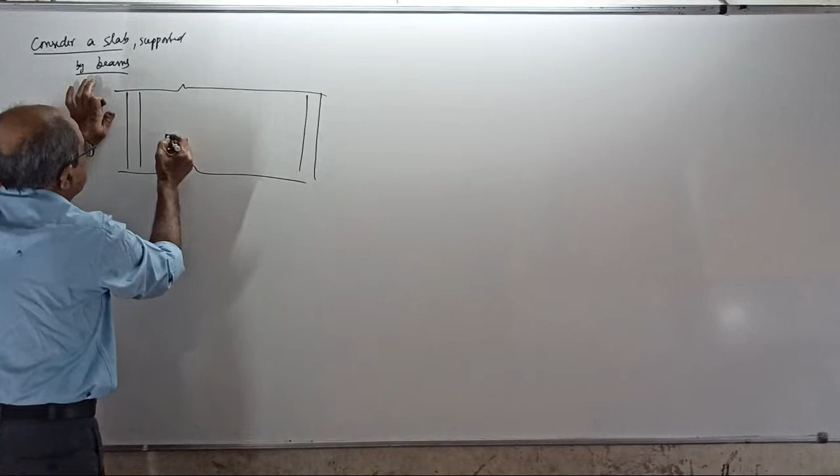Remember this - for others it is extra information. This is ETABS modeling. This is the slab here, cut - now this is the slab. See, the slab is spanning like this. This is a beam here. Imagine center to center is some span L.

Now tell me, when you design the slab, what is the most important term for slabs? Fast - most important term for slab. See, in case of beams, the cross section is B by D, where B is the width and D is the depth.

If I take the cross section here, for slab also the cross section is B by D only. But remember, D means what? Tell me, for slabs, what does this D mean? Fast, do not waste time.

Fast answer - where do you get these ideas from? For slab, D stands for thickness - slab thickness, or depth of slab. You can write slab thickness or depth.

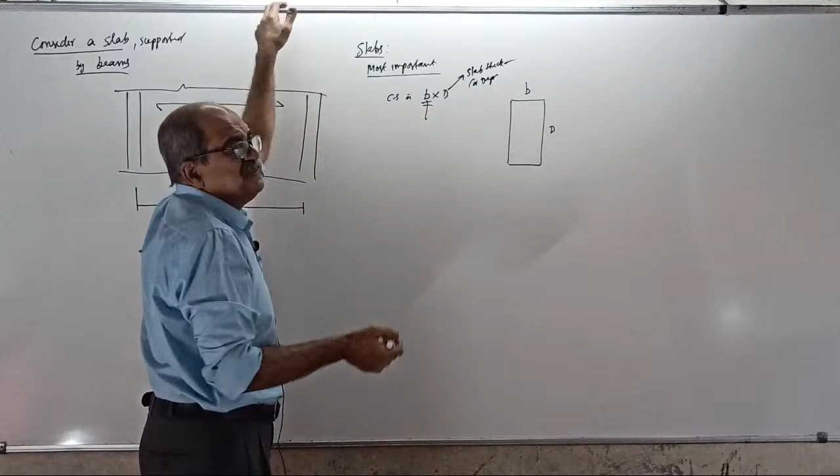Therefore what you do is - the width is not specified. Suppose there is a beam, room, slab, 4 meter by 5 meter. Imagine 4 meter this way, 5 meter this way. If I design the slab along the 5 meter span, width will be 4 meter. If I design along the 4 meter span, width will be 5 meter. But that way people don't take it - for understanding, we always consider what?

For slabs, remember, we always consider a 1 meter strip. How is it? If the slab is spanning this way, remember the strip will always go along the span, this way. This is the width strip of the slab.

This is 1 meter. Now if I take a cross section, what can I see? You can see the slab like this - this is width of slab B, this is D. D is the slab thickness, and this B becomes 1 meter. Clear now? When you see lengthwise bending, B comes here - this is your 1 meter, this is your B.

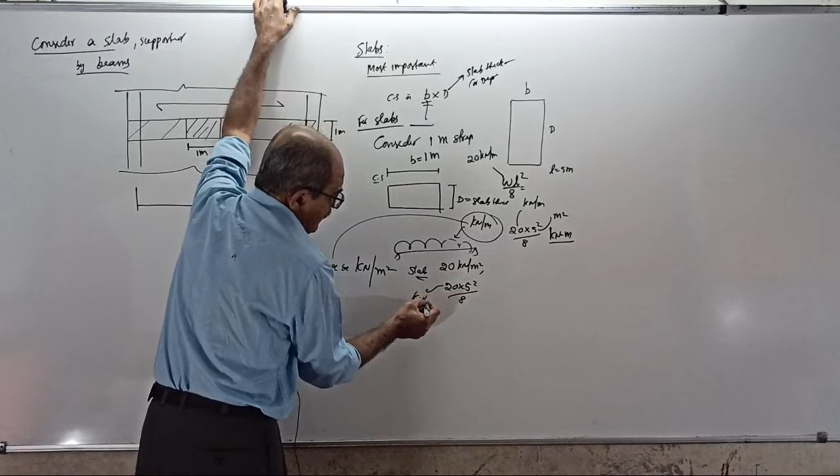But for slab, if you take the load the same way - 20 kilonewton per meter square - when you take bending moment, 20 into 5 square divided by 8. 20 is in kilonewton per meter square, 5 square is meter square. Tell me what happens - kilonewton per meter square into meter square will not become kilonewton meter, it will become kilonewton. For beam, kilonewton per meter into meter square gives kilonewton meter. For slab, kilonewton per meter square into meter square gives kilonewton. Clear or not?

Fast, clear or not? No, this is a wrong concept. It is not kilo - how can the bending moment be in kilonewton?

This will also come in kilonewton meter only, because this 20 kilonewton per meter square is kilonewton per 1 meter length and 1 meter width. Don't consider width for bending moment - it's lengthwise bending moment. When you take lengthwise 1 meter, it is 20 kilonewton only, or kilonewton meter per meter strip.

So therefore, in case of slabs, even though we write loading as kilonewton per meter square, it is actually kilonewton per what? Other width is not considered. One word required, not meter square - it is kilonewton per meter only. But the other meter is the 'way' meter. So you write kN per meter square, but when you imagine along the span, it is kilonewton per meter.

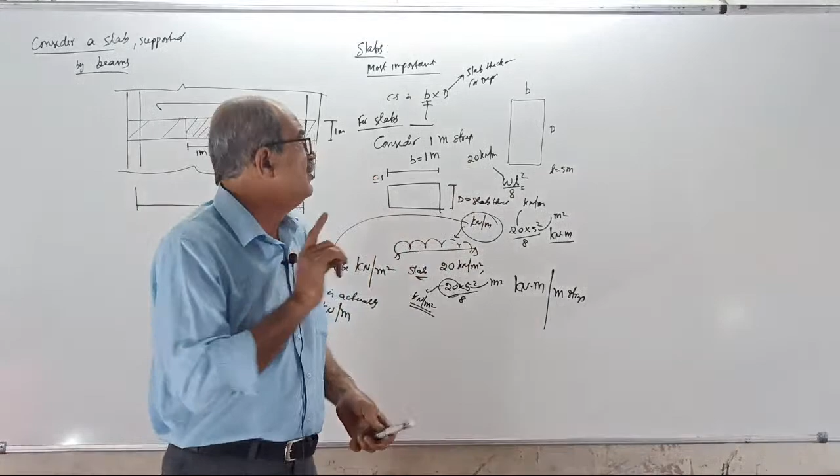Okay, now second one - this is one concept, I will not repeat it again. Remember, in building projects also this will come. I will not tell it once again - remember. Okay, now second important point.

See, suppose you take a beam supported by a column. Load is 20 kilonewton per meter, span is same, 5 meter. Tell me what is the reaction? 20, imagine symmetrical: 20 into 5 divided by 2 equal to 50 kilonewton. This also 50 kilonewton. Why? Kilonewton per meter into meter by 2, kilonewton. This is the upward reaction on the beam from the column, 50 kN.

Therefore, later when you consider the column, there is a downward load of what? From the column to the beam, if there is an upward reaction of 50 kilonewton, then from the beam to the column, a load of 50 kilonewton is transferred down. This will give compression to the column. Clear? This is the load transferred from beam to column. So therefore no problem - why? It is axial load this way.

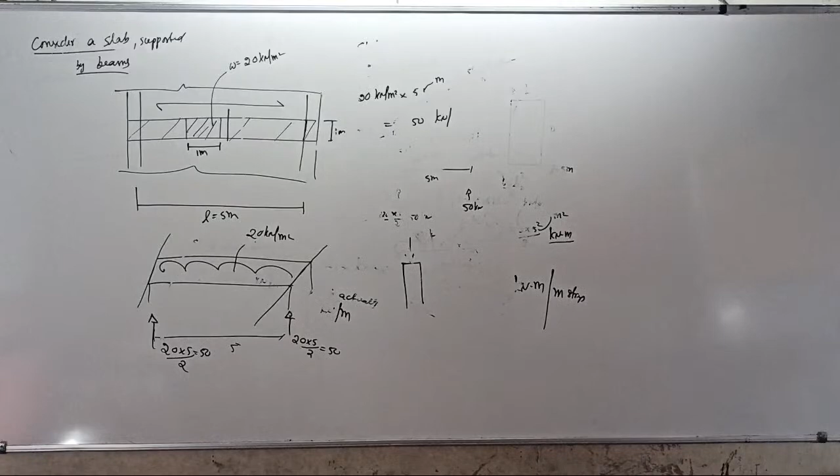50 is kilonewton per what? It is 50 kilonewton per meter. Correct. Now what you do is for SFBM calculation, 20 kN per meter square, you take as 20 kN per meter. 50 kilonewton per meter, you take as 50 kilonewton, because that 'per meter' is per unit width.

Now, when you consider the beam - this supporting beam - see what happens, tell me. I will put 3D here, if one beam, inclined, I show this way. See, the slab is resting, or the slab is resting for 1 meter length. For this 1 meter length of the beam, it is transferring a load of how much?

50 kilonewton. Therefore remember, if the reaction is 50 kilonewton for a 1 meter strip, tell me, from the slab, when the load is transferred to the beam, it becomes what? From the beam, when you transfer load to the column, it becomes a point load. Same way, when you transfer load from slab to beam, it becomes not a point load - along the beam, the load is spread for what length?

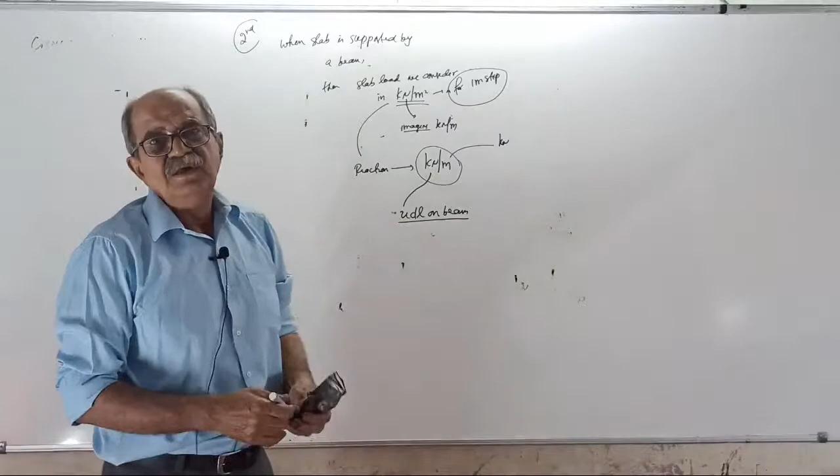But remember, this kilonewton per meter reaction for the slab, whatever comes, when you reverse it, will become UDL on the beam. Concept clear now? Even though you take load in kilonewton per meter square, reaction will come in kilonewton per meter. Kilonewton per meter square, you structurally calculate, consider kilonewton per meter. Kilonewton per meter is kilonewton, that per meter is width, this way meter, not required for us.

When you transfer load from slab to beam, whatever reaction is there for the slab, that is not a point load, it is UDL for the beam. Clear? It is UDL for the beam. Okay, now go to some other points.

Now some other point, I will just dictate here. I won't write because all of you are knowing it. Those who are in the ETABS and SAFE batch and also those in the RCC batch, all of you know it. Others should know it, otherwise briefly.

For a slab, diameter of bar should not be taken more than 1/8 of slab thickness. One concept: minimum clear cover is 20 mm for mild exposure and 30 mm for moderate. We will always take moderate, we will not take mild. So 30 will take. Then next point, slab thickness.

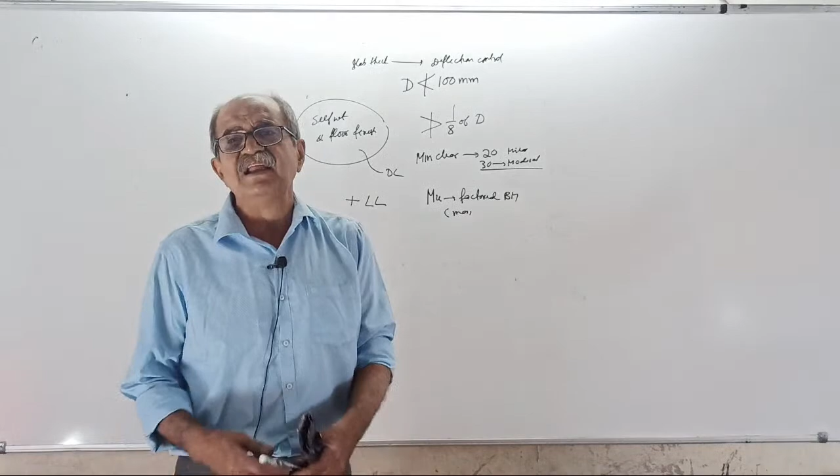So if the bending moment exceeds the limit, it is advisable to redesign the section, as I told for beams. Slabs are not doubly reinforced; slabs are always singly reinforced. Therefore, for every slab, your mu should not exceed mu limit, or you should always get mu less than or equal to mu limit.

Then, how to find area of tension steel? Find AST by the equation mu equal to 0.87 Fy into AST into D into 1 minus AST Fy by BDFCK. On solving, it will give a quadratic equation. Take the least value; two positive values will come, lesser is the AST required.

Next, for slabs, minimum steel in any direction is 0.12% of gross area in case of Tor steel. However, remember, if you use mild steel, we are not using that, why waste time. Generally, 0.12%. You should not give steel less than 0.12%. Tell me, if it is mild steel, how much it is?

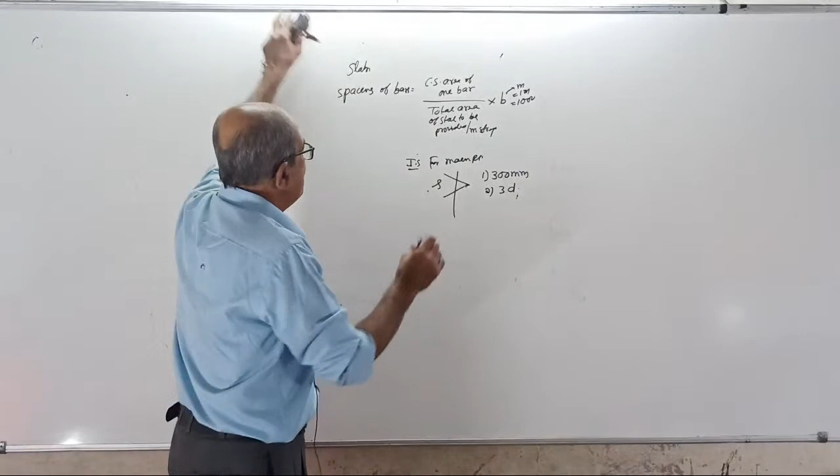However, for distribution reinforcement, spacing should not exceed 450 millimeter. Second one is 5 times the effective depth.

And now, lastly, check for deflection control. How to check it? Find L by D actual. Remember, L by D actual is the danger number, I told you this is the danger number. We want this as less as possible. L by D actual is the danger number. Okay, find L by D actual.

Then, after that, find L by D maximum permissible, equal to a constant based on end conditions, into modification factor on tension side. The constant based on end condition is 7 for cantilever, 20 for simply supported, 26 for continuous.

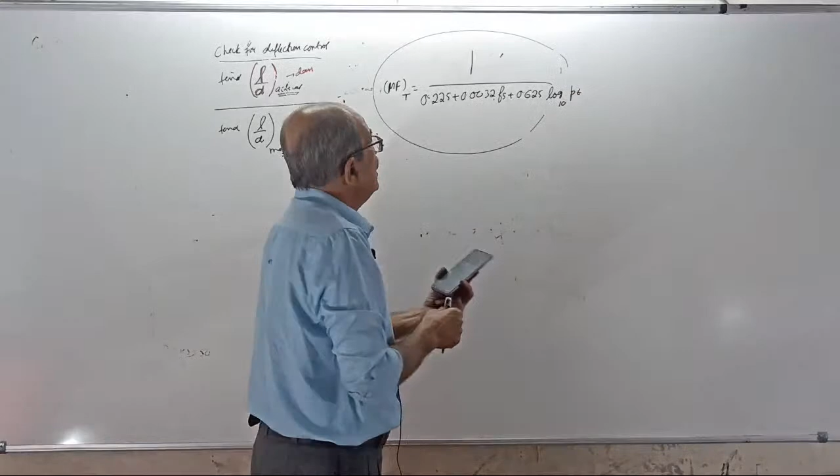Agreed? 1 by 0.225 plus 0.0032 times Fs. Yes, 1 by, thank you, correct. 1 by 0.225 plus 0.0032 times Fs plus what? Plus 0.625 into logarithm to the base 10 of Pt. Correct? Correct now, logarithm to the base 10, because in mathematics and structural engineering, if you simply write log, it is to the base e, not 10. I think the formula is correct: 1 by 0.225 plus 0.0032 Fs plus 0.625 logarithm to the base 10 of Pt.

Yes, okay, now 1 by 1 term. Here, Fs is stress in steel at service load, given by this. I don't require IS code for this because it is a proved one. It is 0.58 times Fy into AST required divided by AST provided. Clear now? AST required by AST provided. Clear or not? 0.58 times Fy into AST required by AST provided. Clear?

Okay, now Pt is percentage of tension reinforcement. Remember, so many places they write tension reinforcement provided, which is technically wrong. I proved it in the RCC class talking for 1 hour. If I meet the IS code committee next time, I will raise a big issue there. It is tension reinforcement required. That's why it is called Pt required equal to 100 into AST required divided by BD.

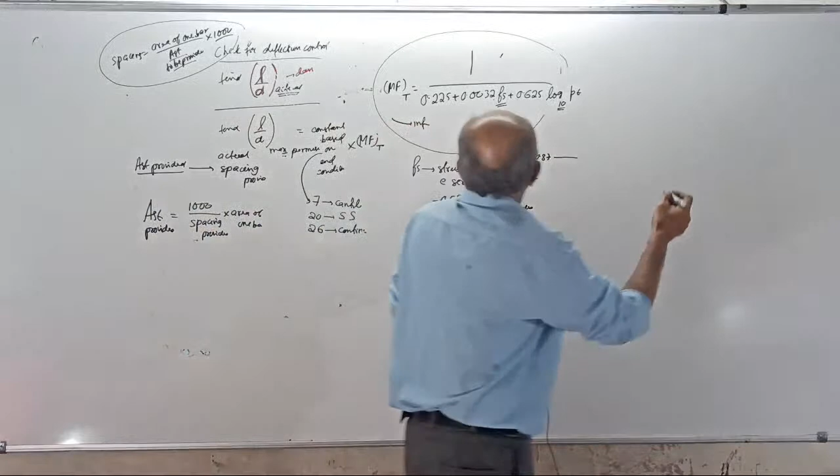And for your information, I will write somewhere here, I will forget later: 0.225... who knows, 0.0032, I will again forget it, and 0.625. And for your information, those who are in the ETABS and SAFE batch, you don't have to

perform check for deflection manually. Tell what to do, tell me what to do, you don't have to struggle. All you require is what? Use what, very thoroughly we covered. To check for deflection it will take 10 seconds. What do you have to do? Tell me, those who are in the ETABS batch, you can tell. To check for deflection, what to do? Fast, you don't have to do all these things, directly it will tell you safe or unsafe.

Tell what to do, to check for deflection control for slabs, what to do, fast. You are not answering. What you have done long back in slab marathon, when you want to check for deflection, I told you during project also the same thing: you got Excel sheet, use the programming, we got Excel program to check it. Today what I will do is, when the check comes, briefly I will check manually. Simultaneously, one of you check in Excel and tell me answer tallying. Agreed? One of you tell me check by Excel and tell answer tallying.

See, now in case of ordinary slab, slab is like this. Self-weight will act like this, floor finish also will act like this, live load also will act like this. So if I take the slab here, this way slab, strip of 1 meter. Load is downward, bending comes this way, yes or no? Therefore, no problem, just similar to beam. Only change is we consider 1 meter strip, load is kilonewton per meter square, reaction is kilonewton per meter. Kilonewton per meter square is kilonewton per meter only, and reaction, kilonewton per meter is kilonewton for 1 meter length.

Okay, now in case of staircase, see, there is 1 meter. I dropped the cover—if the cover is not there, this will stop writing. One minute, where is it? Just a minute. I got it, luckily got it. See, in case of staircase, imagine there is a landing slab here, this way.

Okay, sufficient. Then this is the waist slab. It will go like this here, see. This is the staircase. Now see here, this is the landing slab, horizontal, landing portion horizontal. This is called going, see, this is the inclined portion. People call this as going—horizontally called going, see, this length horizontally is called going. Remember, later I will not tell. Here, see, whatever is the inclined portion is there, its horizontal equivalent is called going, G.

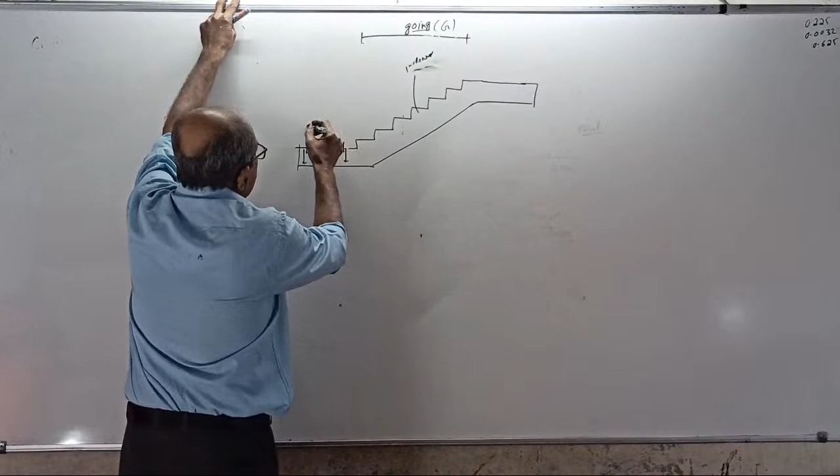Okay, over. Now see here, self weight acts this way, finishes also acts this way, live load also acts this way. So therefore no problem here, loading is vertically down. This is the span, correct? This is the span, tell yes or no. Same thing here also, same thing here. Fully clear? For landing, it is like ordinary slab. Landing slab is this way, load self weight also is vertical. Then self weight vertical, finishes vertical, everything is vertical, span horizontal. Fully clear? Tell me first.

Okay, now consider the inclined portion. Tell me, for inclined portion here also, live load is vertical only. Remember, for inclined portion also live load is vertical only, don't tell horizontal, live load is vertical only, correct? Nobody is going this way. Live load is vertical, and then weight of steps also is vertical, is this way, see, weight of steps also same way. Then what about the waist slab?

What about the waist slab? Live load is this way, weight of steps are this way. What about waist slab, vertical or inclined? Fast, only waist slab - inclined? No, sorry, wrong. Weight of waist slab is also vertical.

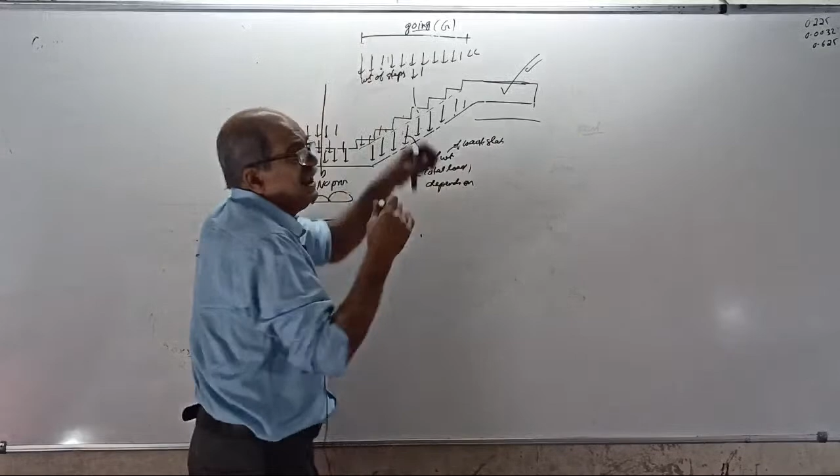But total load of what - waist slab, self weight of waist slab - depends on what length? Horizontal length or inclined length? Tell me.

Load is vertical only, but the total load when you calculate, it depends on horizontal length or inclined length? The total load depends on inclined length. Remember, even then, load is vertical only. If load is vertical, when you take moment, load into this distance. So for bending moment calculation or shear force, we consider horizontal span.

But total load depends upon inclined length. So tell me what to do. Therefore, for self weight of waist slab, we have to increase the load or decrease the load? Self weight of waist slab - increase or decrease?

Fast, I won't go into theory here. If you remember, those in the RCC batch, I proved it mathematically. We have to increase the load - increase the load intensity.

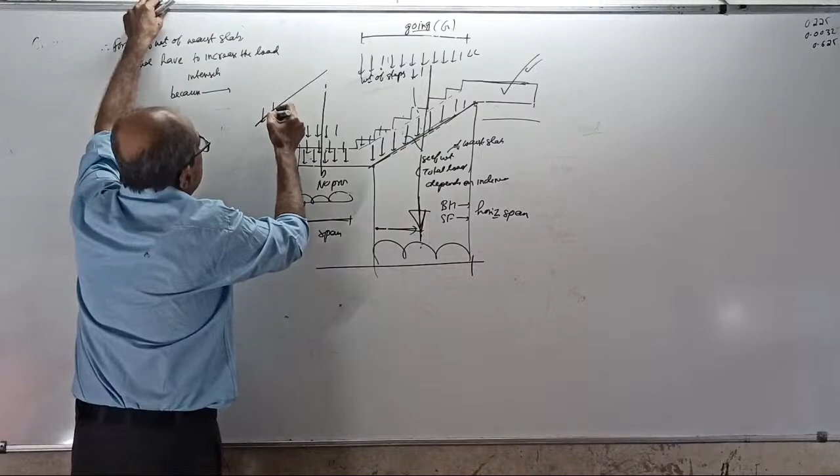When the load on a larger length is replaced by equivalent load in smaller length, total load should remain same. Suppose, for example, along the inclined length, if the load is 10 kN per meter for an inclined length of 5 meter, imagine for the same 5 meter, horizontal span is 4 meter. Tell me, what is the UDL here? It is 10 kN per meter for 5 meter - that's the total load divided by how much?

Total load should remain same. 10 into 5 is the total load, but divided by how much length now? To get the equivalent in plan, divide by 4. 10 into 5 is 50 kilonewton. Earlier, 50 kN spread over 5 meter. Now 50 kN spread on 4 meter will become 12.5 kN per meter.

Or I will give a formula for you. If it were an RCC class, I would tell you normal component, tangential component, resolution, etc. - anybody who came to RCC class will remember I told all those things, and I did the BM 3-4 times using normal component and inclined span etc. Everywhere the answer came same, but this class is not for that theory.

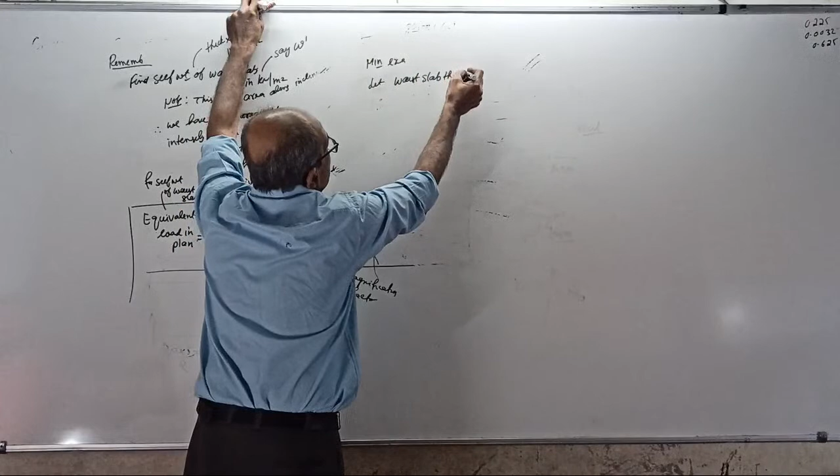Now, whatever answer you get, change it to get equivalent in plan, just to understand so that later no trouble. One mini example: let waist slab thickness equal 150 millimeter, and let R equal 160 millimeter and tread equal 275 millimeter, random numbers for rise and tread. Now see what to do.

First, self weight of waist slab. Don't write the full formula. Waist slab equal to, formula is thickness of waist slab 0.15 in meter. Width is not there, we want per meter square area, multiplied by 25. Tell the answer, it will come in kilonewton per meter square. If somebody asks me sir why 25, don't come to my class, leave the class, you are not knowing about RCC, then why did you come to staircase class?

Answer: 0.15 into 25. For a beam you have to write width into depth into 25, then you get kilonewton per meter. Now only depth. Answer fast.

3.75. It is 3.75. Now this load is to be magnified. How? Therefore calculate equivalent of this load in plan equal to whatever answer you got there, into square root of T square plus R square divided by T. Remember, here unit is not a problem. Take the answer 3.75 into root of, since it's in meter square, tread is 0.275 square, rise is 0.16 square, divided by 0.275. Answer: it will come equivalent in plan.

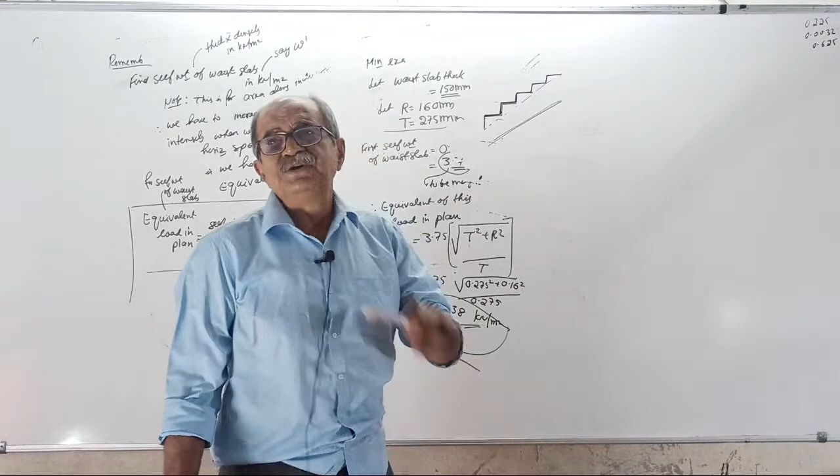Tell me, and sometimes handrails will be there. They are not very major, minor. So considering what, finishes for tread and rise both, and also handrails and plastering etc, ceiling plastering all. When you consider floor finish, consider slightly what, higher or lesser? What usually comes in normal case? Don't waste time on equivalent for that one, consider slightly higher side, that's all.

If someone tells exact calculation, then I will take him to task. Exact calculation you want, do it then. I will tell them, how did you find bending moment? WL square by 8, is it simply supported there? No, there is a beam there, partial fixity is there.

Rigid joint. Account for the moment there. That's all you are not considering - the major issue you are not considering. And just this small variation you are bothered about? So keep quiet, that is the answer I will give. If he answers that question, I have further questions to ask. My questions will never end.

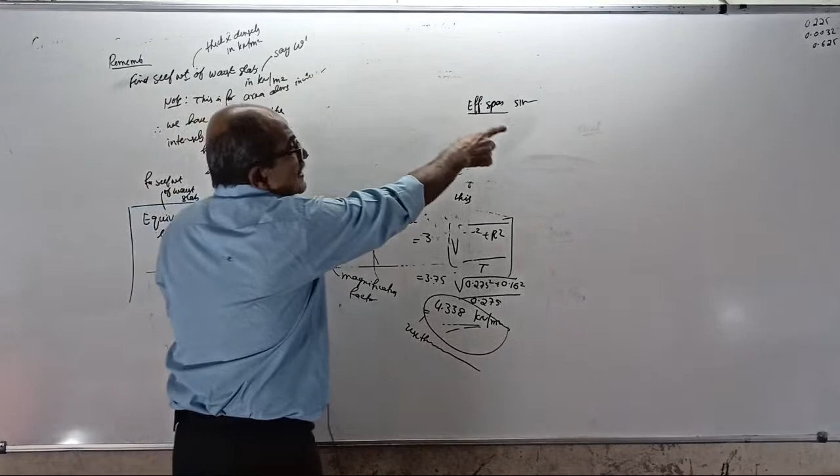Okay, now we are ready for design of staircase. The only important thing is how to find effective span - that I will tell you simultaneously with our first solution. How to find effective span, I will tell simultaneously. Somewhere here I solve the question, and side by side I will write the effective span portion here. After the class, whatever I write here, make a separate note - this saves time, otherwise you have to take numbers separately. So I will start the solution here, then side by side I will tell the IS code provisions.

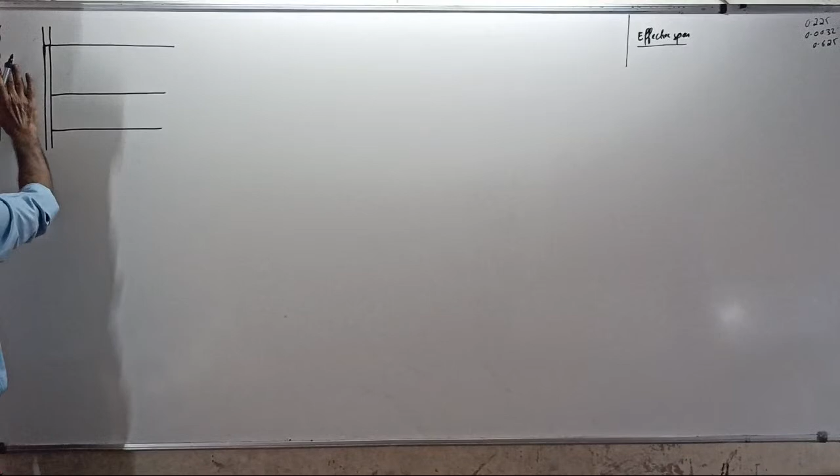See, imagine this is the staircase room. There is a beam here, a floor beam, and then this is the staircase. And remember, the floor beam may continue - there can be slab here, slab will be there, don't worry about it, slab can be there. Now, see - 1, 2, 3, 4, 5, 6, 7, 8, 9, 10 treads.

Means 11 risers, then this way. I will not do an academic question - academic questions are done some other way, how they give in examination, that way you won't do. Then there will be a landing here, mid landing, and there will be a beam here also.

This is the supporting beams. Just imagine the supporting beam width is 0.2 meter, 200 millimeter. This also is 0.2. This is a beam - see, I will put one thing, a light line, I will have the beam, just to show it can be wall also. Wall is not considered. Now imagine rise is

say 150 millimeter, very popular. And tread is - rise means R, tread is T. Rise I will take 150 mm, 6 inches, very very popular, 150 mm.

Tread I will take as 250 millimeter, that is 10 inches. That is the tread. Therefore, see, this is the width of the landing slab, the mid landing slab width.

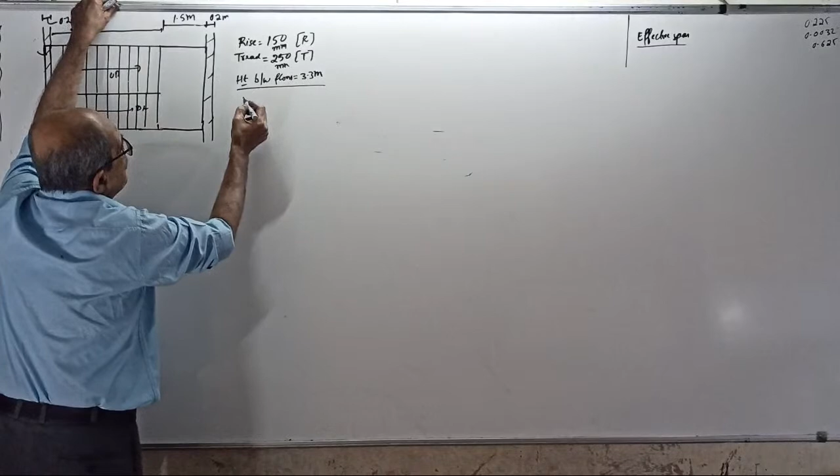Then further, I want first, what is this dimension? Tell the answer. See, there are total number of risers. Number of risers equal to 3,300 by each rise is 15, 150.

Tell how much. Sometimes for some reason it may not be 150, it can be 152 point something. Suppose the height is not a round number, they will adjust it, no problem. Suppose height is 3.25 meter, rise will be 148 point something. Or if height is 3.35 meter, rise can be 151, 152 millimeter point something. That is no problem.

22 is the number of risers, that is, 11 risers in each flight. Clear? I am going for the first one, this is called dog leg staircase. Make a note, this is dog leg staircase.

Okay, 11 risers, and therefore tell what is number of treads, number of treads in each flight. Remember, if you have difficulty, go to a staircase, count and come back. If per flight, for one flight, 11 risers are there, tell number of treads.

Number of treads, 22 risers total, each flight 11 risers. Number of treads will always be 1 less than number of risers. It is 11 minus 1 equal to 10.

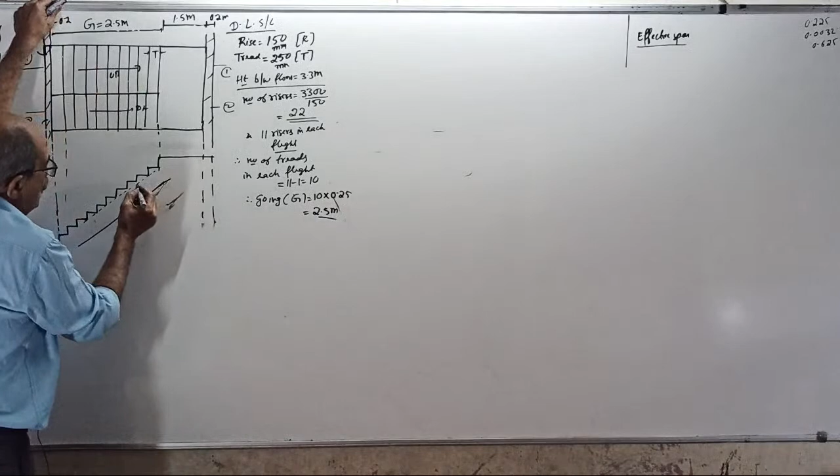Now this is the line joining the edges. Parallelly you can see waist slab thickness here. See here there will be, see what will happen here, there will be a beam here. Here no beam, usually beam is not given here. If it is given, I will tell you later. This will come this way, then see what thickness is there, you maintain that one. Do not do this way. See, do not draw like this at all.

Maintain the same thickness here.

Okay, done. Here what will happen, there will be a beam here. See, this is a beam. This is a beam here. Here beam will be, this is a beam. Nobody wants beam inside portion here. See this arrangement.

Clear? This beam width is 0.2 meter. This beam also is 0.2 meter. And this total length here is 2.5 plus 1.5, exactly 4 meter.

Therefore, the center to center of beams, see, this will become what? Effective span, or L effective. Tell the answer in meter. Tell the answer from center of the beam to center of the beam. Effective span. Tell the answer.

I want to show the calculation. Effective span from here to here is 4 meter, 0.2 there. Effective span, fast effective span, 4.2 meter is effective span. 4.2 meter effective span. This fully clear?

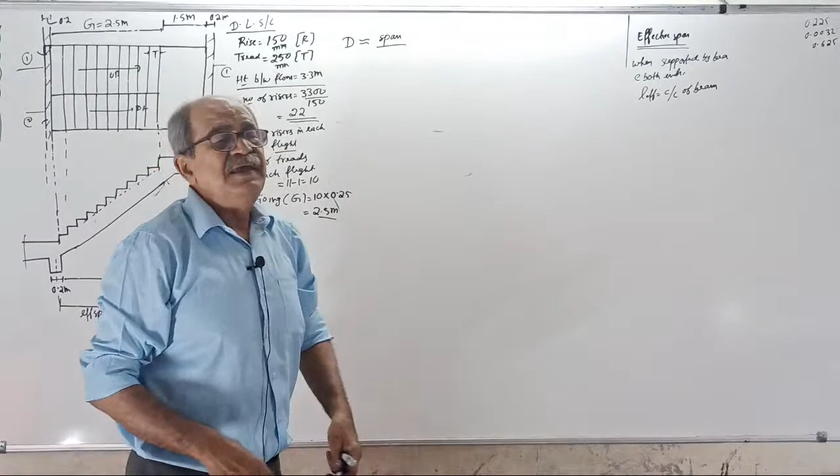Now, once you get effective span, you first calculate slab thickness of slab, capital D. Capital D can be taken approximately span by, if you remember, tell me the answer. Now, depends upon, is this simply supported or continuous or what? Is it simply supported or continuous?

I want to design only staircase slab. This slab I am not bothered. This slab will come in the floor design.

See, you can see one, as you enter the staircase, below one beam will be there. You go there, reach the mid landing level, there is a beam there, supporting beam, come take a U-turn and then again go up next beam level. It is actually not simply supported.

Remember, make a note here. If I see along the length here, if I put inclined portion here, see, there is a beam here. It goes this way, then this way. There is a beam here. Actually, it is monolithic with the beam. Yes or no? It is, see, monolithic with the beam.

And here also, when the beam is there, there is continuity here. There is continuity here, and here it is monolithic. Tell yes or no? There is a continuity here, and there is monolithic. These all you have to remember.

I am going for practical design, not academic design. My class is for ETABS and SAFE batch. Others get benefit if you understand.

Yes, therefore there will be a reacting moment here. There will be some reacting moment here. Remember. But what happens is, this is inclined, this is this way. It is not purely continuous, or it is not fixed. This hogging BM at the ends, by chance, if ignored,

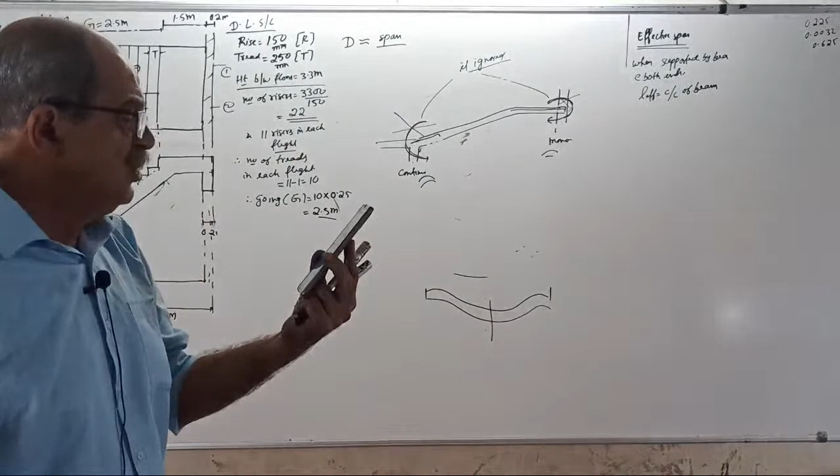Hogging is there. No problem. Afterwards, there will be top reinforcement here. Clear now? Afterwards, there will be top reinforcement there to take care of hogging BM. Clear or not? So even though we are designing as simply supported for easy understanding, there will be some hogging here, some hogging here.

Because of the hogging, what we will do? Because of the hogging effect there, later, sagging will reduce. We are designing for higher sagging bending moment. And for hogging BM, whatever bottom steel you provide here, same top steel also you provide. So you are providing high hogging steel. So it is safe. Practically, all are doing like this.

And then, one important aspect, tell me, deflection control. Tell me, because of the hogging, deflection will be more or lesser?

One more thing, staircase is not like a single straight line. When there is a junction, deflection becomes more or lesser. If it is a single line, this is the deflection. But when there is a junction, will it increase or decrease deflection? That junction and also end conditions, will it increase or decrease deflection? Decrease deflection. Therefore, for deflection control, you can take continuity is there.

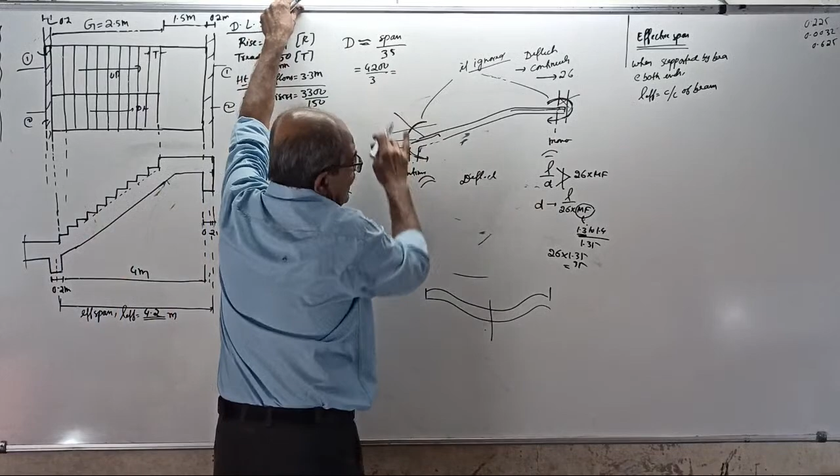Or you can do one thing, for safer side, tell what? Or safer side, take what? Not 35, take what little lesser value. If you take 35, thickness may come lesser. Safer side, take practically 30. One minute now, I will calculate.

See, if I take 35, it comes to 120 millimeter, correct? Yes or no? If I take 35, it comes to 120 millimeter. Yes. If I take 30, it will come to 140 millimeter.

So tell me, span is around 4.2 meter. 150 mm thickness better or 125 better? Think a little. Span is 4.2 meter, 125 better or 150 better? Think a little. 150 better.

So take 30, still safer side. How much? 140 millimeter, round off. Therefore, try capital D 150 millimeter. Clear now? This step is clear. Try capital D 150 millimeter. Clear or not? And one more thing I forgot now, loading I will tell you.

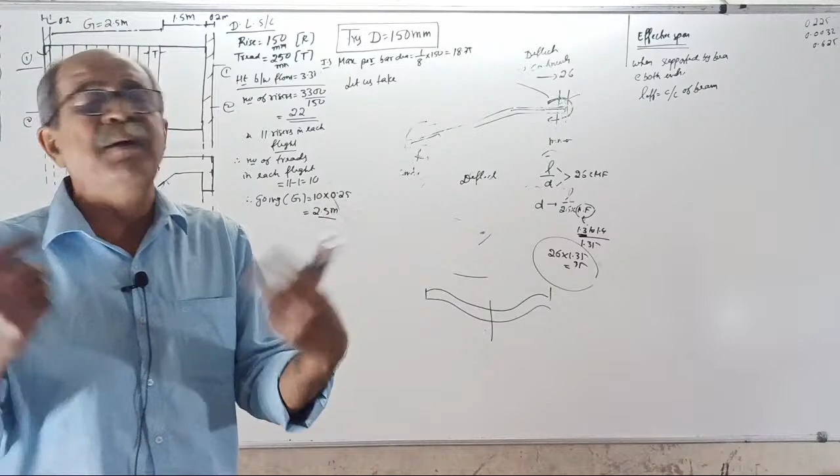4.2 meter span, loading is going to be more than usual slab. Yes or no? For staircase, loading is going to be more than usual slab because self weight of staircase is to be converted, then weight of steps are there, etc. Loading is more. On those reasons, better take in the beginning higher diameter or lesser diameter? I told you, if you take a diameter, later if you are changing, if you decrease the diameter, well and good, no problem, your D will become more. But in case you have to increase the diameter, problem will come.

Better take higher side. We will do one thing. Say, for this staircase, I feel 12 tor is okay. Clear? You write there, I think 12 tor is okay. I feel 12 tor bar can be managed.

But still, tell me, to be on safer side, later I do not want trouble with the D. I will take, let us initially assume diameter of main bar, tell how much, safer side, for margin. How much? I will not take 12, how much I will take? For safety, later I do not want redesign, take 16 mm, so that later if you reduce, well and good. 16 mm, okay, now minimum clear cover.

Remember, mild exposure for slab 20mm, for beam 10mm more for stirrup. Here for slab, clear cover we will take 30mm. That means moderate exposure.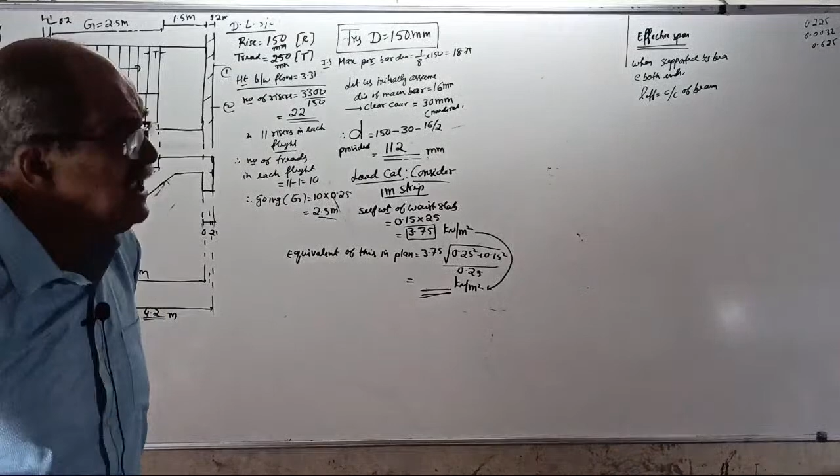Okay, then immediately calculate equivalent of this load in plan, equal to 3.75 into square root of tread square plus rise square, 0.25 square plus 0.15 square, divided by 0.25, as I told you earlier, kilonewton per meter square. Now this is cancelled, this will come as a new modified value. Equivalent in plan equals whatever you got there into root of tread square plus rise square divided by tread. This is the equivalent load in plan: 4.373 kN per meter square.

Now you calculate weight of steps. Remember, tell me, is this dead load or live load? Very important, because in ETABS, dead load and live load have separate assignment. This is dead load. Remember, this is dead load.

Now, weight of steps equal to, I'll give a note for you: depth into density. Depth into density. Usually for steps, plain concrete is used, therefore density is taken as 24 kN per meter cube. And depth means rise, yes? See here, this is the tread, now this is how it goes.

This weight is already over. Now this is the rise R. Depth is rise, clear? But one thing, since it's already over here, full rise. As you go here, the rise will become lesser, toward zero. Therefore, since the rise varies, take average rise: that is 0 plus r divided by 2, or r by 2. So self weight of steps is always equal to rise by 2 into density, per meter square. Clear or not?

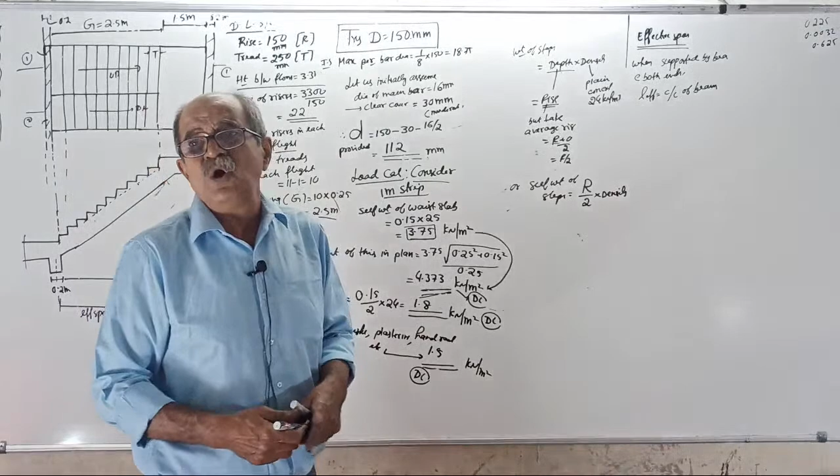Tell the answer, don't argue all these things. A little liberal, a little higher side. How much? Usually for building floors, 1.25 like that, but a little higher side, so that it's safer: 1.5. Okay, agreed, 1.5 kN per meter square. This also is dead load, correct? This also is dead load. Now therefore, this I will remove now. Even the effective span portion I will remove because I will continue later.

Tell yes or no. Now tell me, from here to here, tell the length. From center of support to the junction, tell the length. Center of support to junction, tell the length. Correctly observe the plan.

How many corrections? Center of support, that you should be able to calculate. I don't have to explain. It is 2.6 meter, this is 2.6 meter.

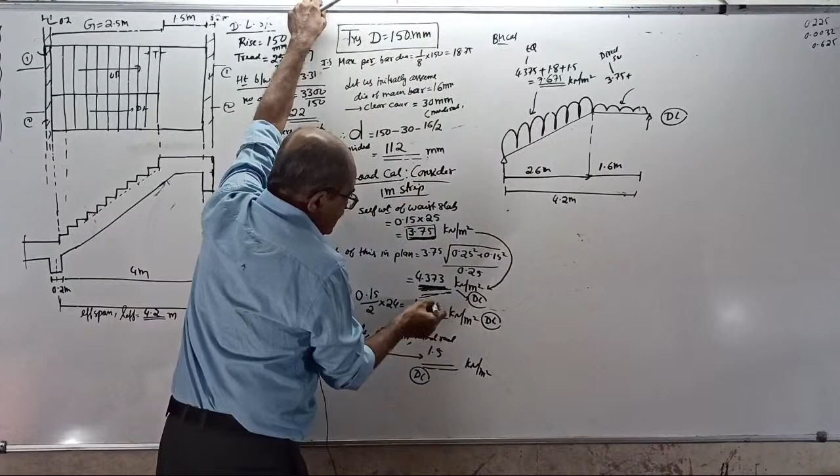Direct self-weight plus others are same. And remember, for landing slab, step weight is not there. Clear? Weight of steps are not there. I think that should be clear. There is no steps there. Clear? No steps there.

Not clear? No steps there for landing. Yes, so only finishes 1.5. Tell the answer, 3.75 plus 1.5.

I will tell you systematically, then I will tell you practically what to do. Remember, this class is for practical knowledge, not your academic knowledge. Some people will tell, how you can take that way? I am taking that way. Keep quiet.

Answer, add those two, I am writing only dead load. Add those two, it's 5.25. Okay, 5.25 is here, 25 kN per meter square.

Then now I want live load. Same way, I want live load. Live load is everywhere same. How much? Tell me, everywhere same. How much? This one and this one, both how much? Live load, see, how much live load?

Tell me, if it is residential building, how much you can take? Fast, imagine residential building around. Don't take high value. Residential building live load, around 2, 2.5, etc. Imagine our building is a commercial building, so imagine it is public office or commercial. Therefore, live load, I will take 4 kN per meter square.

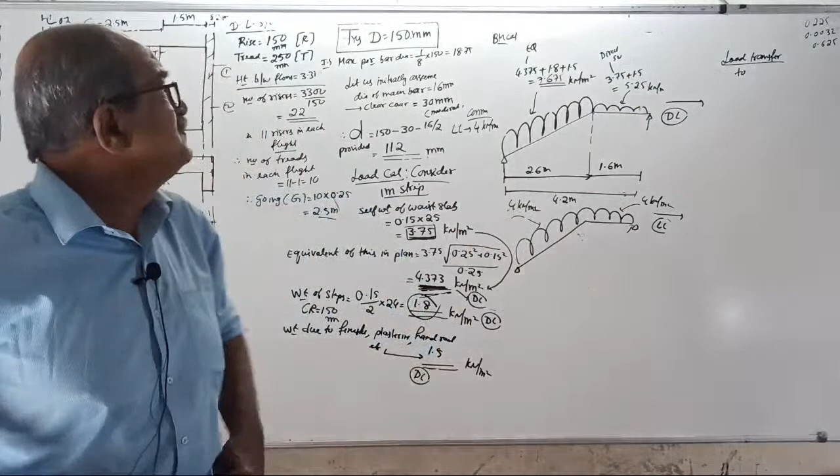Load transfer to what? Tell me. This is a practical class, and this is what is important for you. When you do the building model by ETABS, staircase load has to transfer to beams. Staircase load transfer to which one? Beams. Load transfer to supporting beams. For that, see, even though it is inclined, now load is vertical, length is horizontal.

Someone will tell, this is more length. It is more length, that's why we magnified 3.75 to 4.373. Therefore, now the length is only 2.6, correct or not? Now the span is only 2.6 because this 7.675, 4.375 is for 2.6 meter only. Clear? Important concept. Now the span is clear, no inclined length.

Now, therefore, what you can do is write one sketch here. See this way, visible, board visible fully. Let me see if the board is fully visible. Okay, visible. One sketch there and put one sketch here.

Here, for a length of how much? 2.6 meter, and then remaining length of how much? 1.6 meter. Here you write load of 7.675 kilonewton per meter square. Here you put lesser weight of, one minute now.

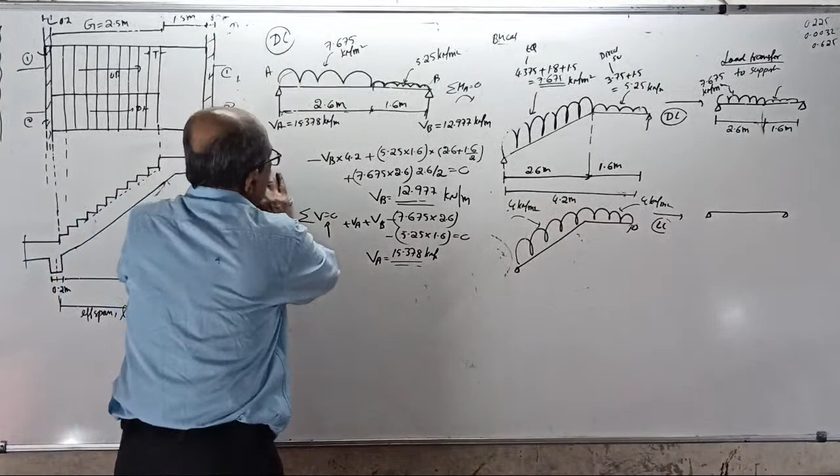Okay, now wait for some time. Some will tell, sir, this is too lengthy. No, wait for some time. Now consider live load. Live load, you don't have to show the junction.

Simply show a load of 4 kilonewton per meter square. Span is 4.2 meter. Tell the answer directly: total load divided by 2, this way and this way will be equal. Tell the answer: 4 into 4.2 by 2.

8.4 kilonewton per meter. Okay, therefore tell the answer now. See, I am removing this one now. Therefore, during

ETABS modeling, see, there is a beam here, and I will put the beam on meter, I will put a name here. This beam I will call P, Q, R, S. For the beam PQ, tell what? For the beam PQ, it is like this. For the beam RS, this is P, this is Q, this is R, this is S. Clear now? PQRS. Clear or not?

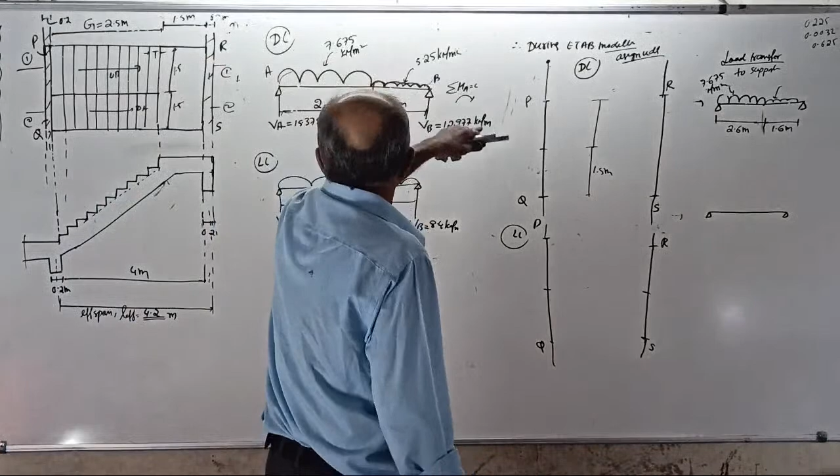Yes, you should know that one. Here, see, now very, very important. See, suppose it is mid-landing level. Mid-landing level, this beam, RS. Then what? Dead load of, tell how much, tell me. From R to S, assign dead load of how much, tell me. If it is mid-landing level, assign dead load of how much, tell me.

R to S, assign dead load of. See the sketch there, see the reaction here. This is for meter length. 12.977 kilonewton per meter. And this is for mid-landing beam.

Everywhere same. And assign live load of how much? For the contact length here, for what length staircase is in contact with the beam, for that contact length, assign live load of how much? Assign live load of how much? Tell the answer. See the answer here, reaction.

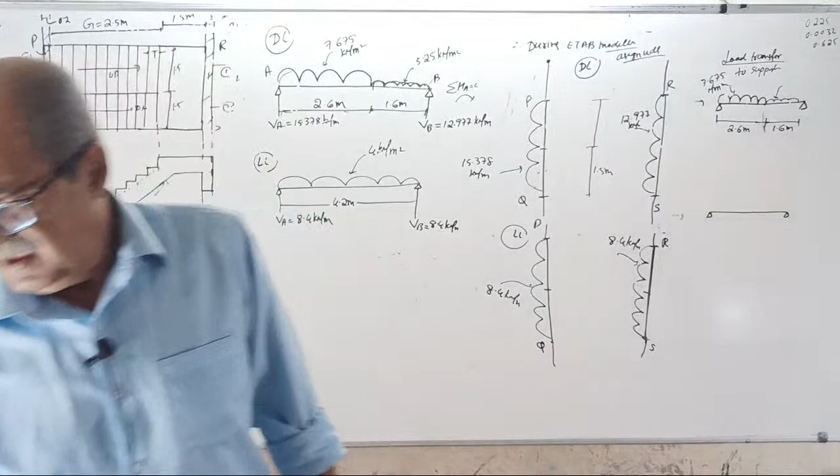But remember, if it is the plinth beam level, base level, suppose imagine plinth beam level, imagine staircase in the base has connected to plinth beam. Suppose no plinth beam, no problem. Why? Separate footing is given. If at the ground level, the staircase is not connected to plinth beam, they will connect to ground by foundation. Clear or not? A small foundation will be there. Clear? If the staircase and the ground is not connected to plinth, a separate footing will be there.

Then no problem, it will not come in the ETABS frame. But if plinth beam is there, assign the load only on this side, see, back side or front side. If it is plinth beam level, assign load of 15.378 dead load and 8.4 live load on the back side or front side. If it is a plinth beam level, tell me, plinth beam level, base level.

See, intermediate level, one floor, one flight ends, other side, one more flight starts, back side. Now tell me, if it is the terrace level, where staircase stops, if you go to terrace level, then assign these two loads on the back side or front side as per this sketch.

See there, flight goes this way. When you reach terrace level, when staircase is not there, further continuation, then assign this load on which side? Front side. Fully clear? Building project point of view, full clear or not?

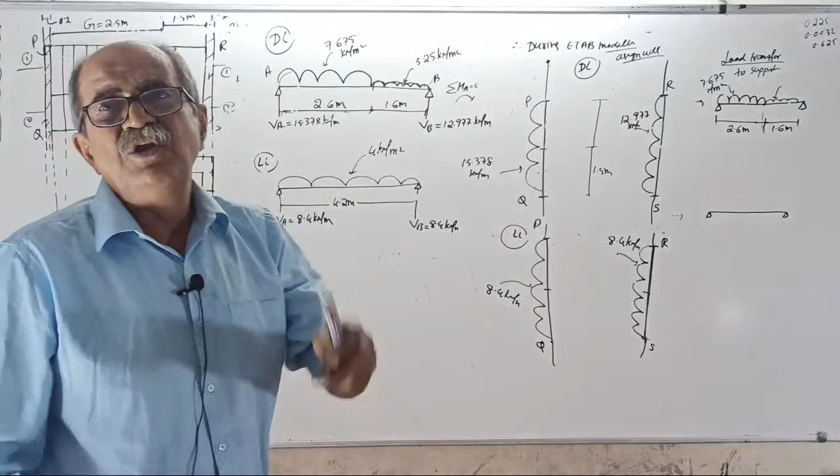I will go you further shortcut. I will make it very easy for you now, very very easy for you. Okay, now our purpose is staircase design.

I will remove this one now. See, now go to bending moment calculation. Now we want now slab design. Slab design you are doing. For that one, you need what? Dead load plus live load.

Yes or no? When you assign the load to software ETABS model, dead load separate, live load separate. But when you design the slab, you should design for dead load plus live load. Yes or no? Tell me fast. You should design for dead load plus live load. Yes or no? Fast, tell me.

When you design, 1.5 later, dead load plus live load. Okay, therefore, what you do is dead load plus live load. If you write, the beam will become, for 2.6 meter, and then remaining 1.6 meter, there will be a change. Here, the dead load plus live load is, tell the answer.

7.675 plus 4. Answer, 7.675 plus 4, equal to 11.675 kilonewton per meter square.

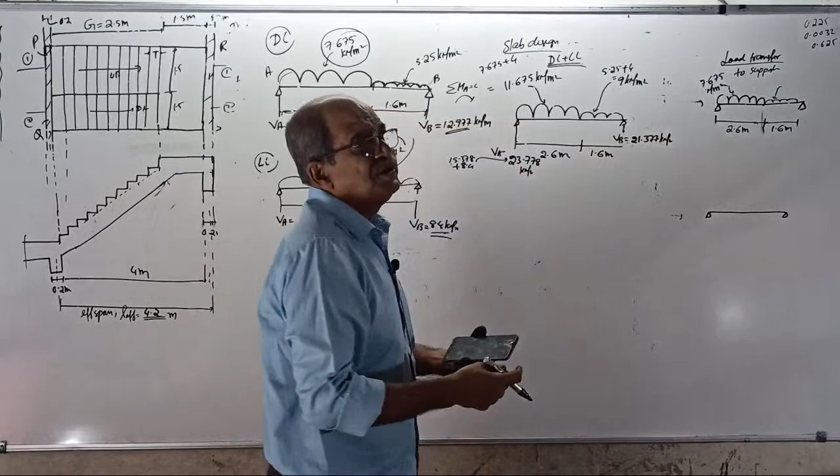377 kilonewton per meter. Now we want maximum BM here. Tell me, this is symmetrical case or unsymmetrical case? This is symmetrical case or unsymmetrical case?

Do not worry, after some time I am going to give you one line answer. You have some patience. Symmetrical or unsymmetrical? Unsymmetrical. Therefore, if you want maximum BM, first you have to draw shearing force diagram.

Okay, I won't ask you, I will draw it. Why? I am quite good in shear force diagram.

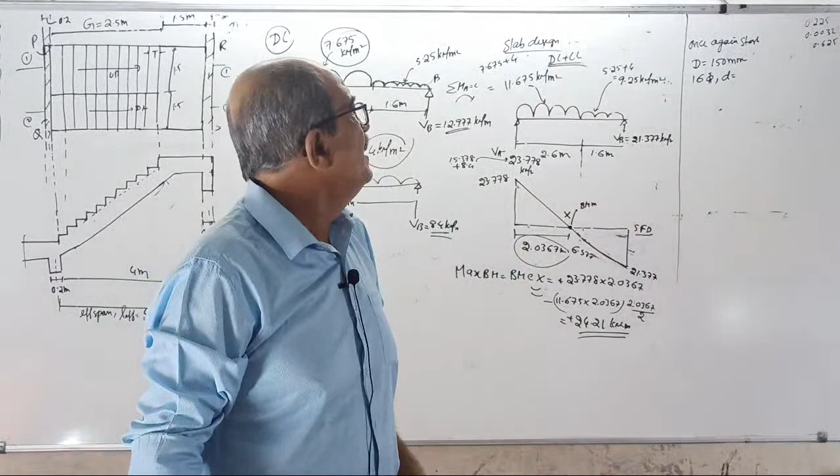Start. Capital D equal to 150 millimeter, with 16 phi, small d equal to what is the value you told? 150 minus 30 is 120, is it? 100, you forgotten. 150 minus 30 minus 8. 112 millimeter, okay. Small d is how much? 150 minus 30 minus 16 by 2 is 112 millimeter.

Okay, then loads. Self weight of waist slab: 0.15 into 25. Answer, how much? Tell me first answer. See, this is what you do practically. Don't do these things, now you will say sir so easy. Tell the answer once again, tell the answer first.

3.75 kilonewton per meter square. Tell me, equivalent in plan, how much? 3.75 into root of t square plus r square by t. Answer, equivalent in plan, first answer. This you have to calculate: 250 square plus 150 square by root, then 2 divided by 250.

Equivalent in plan, once again: 4.373 kilonewton per meter square. Then weight of steps: 0.15 by 2 into 24, 1.8 kN per meter square. Then finishes, you have taken 1.5 kN per meter square.

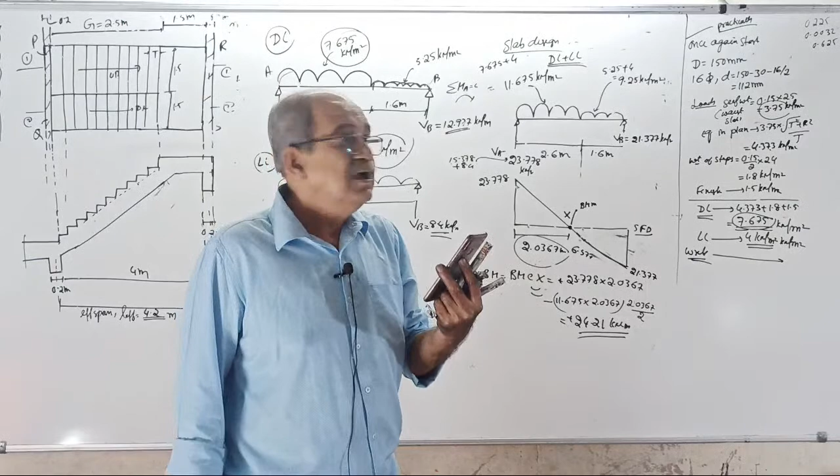In the landing, load becomes slightly what? Tell me, slightly less or more? More, their steps are not there, directly plan. Less, you write less or more, we don't bother. From where flight is there, load is 7.675, and where landing slab is there, it is little lesser, 5.25. Once for all, settlement, dead load.

See how much, tell me, how much, how much, tell me. Full, actually little lesser here. Well leave it, I said no problem, building project, we can't do these things all, no time. How much, how much? People do it this way, how much?

7 point... I am telling 7.673. Okay, 7.673 where landing inclined portion is there. Other portion, I am asking you, where inclined portion is there, more weight. 7.675, is it 675 or 673? 675, 7.675. Okay, where landing is there, little lesser.

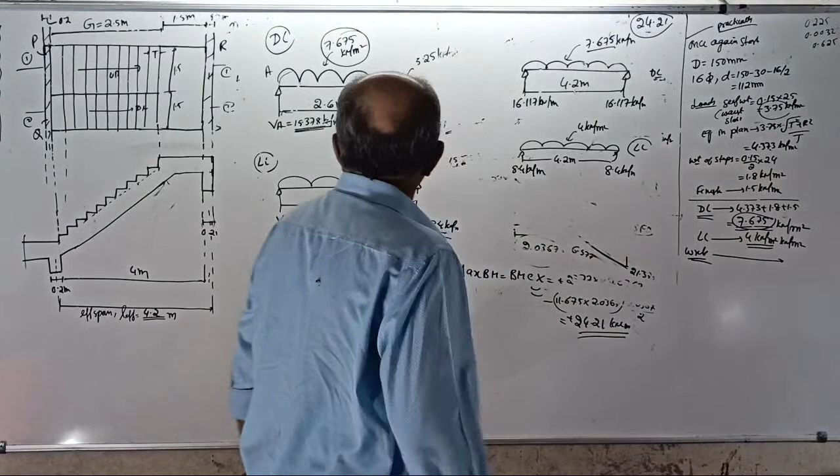16.117. Actually, one of them is 15, other is 12. Instead of 15 and 12, assigning 16.117, safe or unsafe? Tell me, who will bother about these things? Safe or unsafe, assigning both beams the same load? Assign maybe a little lesser, 16 you can make. Safe.

Live load for both the beams assign how much? Both the beams assign... 8.5 or 8.4? 8.4 kN per meter. Some will tell 16.117, make it 16.5; 8.4, make it 8.5. Agreed? Okay, done. Clear now?

You don't have to struggle with all these things. You find the weight of the inclined portion, convert to plan, take that as everywhere. Clear or not? Inclined portion, whatever load comes, convert to plan, take the higher load everywhere the same. Clear or not? Clear. Then add other things.

Dead load, live load, divide by 2, assign. Then, now ETABS problem is over. ETABS modeling problem over or not? ETABS modeling problem over. Tell me, for ETABS modeling, problem over, including load from staircase. ETABS modeling over.

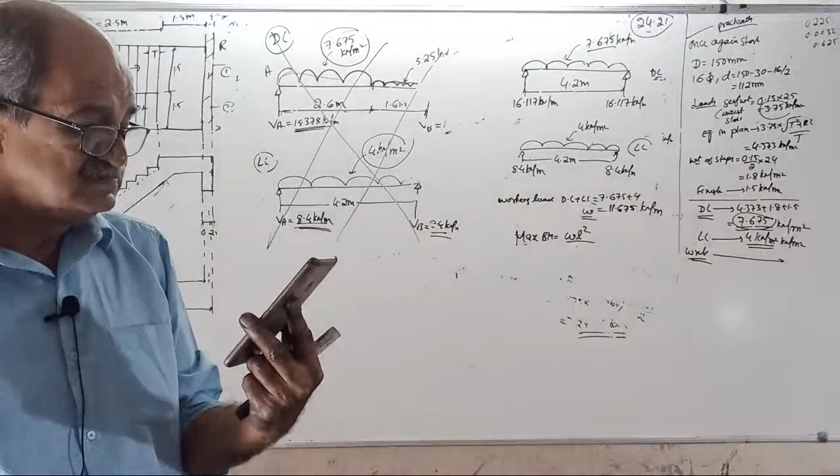Okay, now both UDL, tell me maximum BM. Now no formula, WL square by, safer side, ignore fixity, simply supported. WL square by... how much? This is what everyone is doing. WL square by how much? 8. WL square by 8 equal to

11.675 into 4.2 square by 8. Answer fast. WL square by 8, that shear force diagram here is equivalent, there separate. I will tell you now, one minute. 25.75.

So if you do this way, see now, what you do is, write it: decide slab thickness, self weight of slab, that thickness into density gives weight of slab, convert to equivalent plan. Okay done, some answer, that is dead load. Add weight of steps, add floor finish.

W will come, that's all. Full UDL, that into span by 2 gives reaction. Transfer to beams. Live load 4 kN per meter square into span by 2, transfer to beam. ETABS, you go now.

Now, manual design of slab. Self weight of slab converted to equivalent, plus slab weight of steps, finishes, plus live load, add all. You get 11.675. WL square by 8 will give you 25.75. If you do this way, tell me, is it very, very uneconomical or reasonable? Instead of designing for 24.21, you are designing for 25.75.

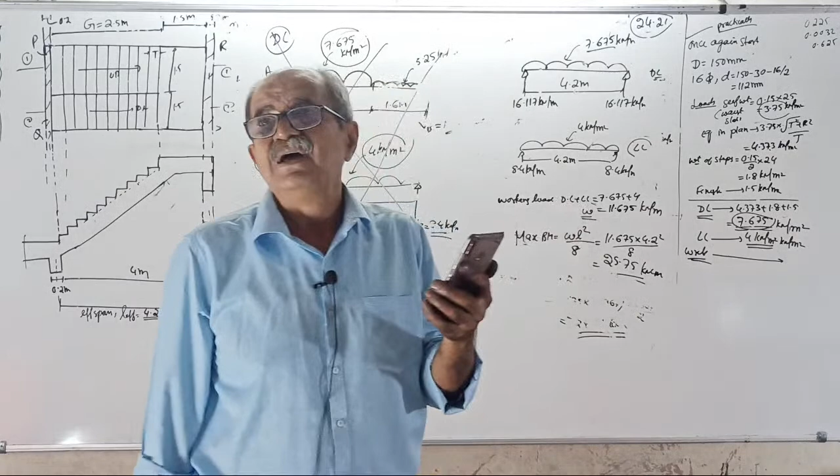Is anybody going to object? Instead of designing for 24.21, you are designing for 25.75. Tell me, is it a serious offense or safer side? Agreed. Suppose cross-checking comes, he will ask, if you do rigorous calculation how much you get? 24.21. How much did you consider? 25.75. Is it safer side? And is there too much variation? Tell me, this way if you do, is there too much variation or small variation? Small variation, and that too on what side, safer side or unsafer side? Small variation, that too on the safer side.

Therefore, these all will cancel, none. As soon as you get this one, you got M equal to WL square by 8. Your W is what? 7.675 plus 4. L is 4.2 meter. You got the answer: 25.75 kilonewton meter. Now proceed further

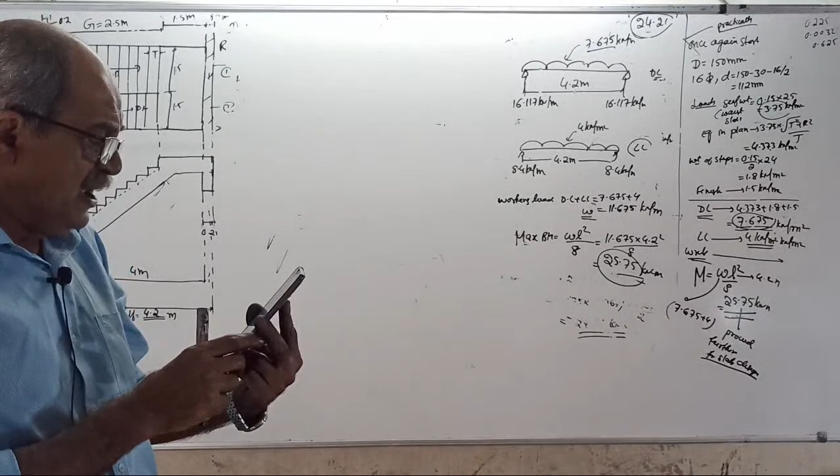Okay, now let's start the slab part. Remember the mechanical steps. Tell me, shall we design for 25.75 or 24.21? Shall we continue for 25.75 or 24.21? 25.75 - therefore remember.

Maximum BM equal to how much? We will take the safer side - why waste time - 25.75 kilonewton meter for 1 meter strip. Start, therefore start. First calculate MU limit.

MU limit equal to 0.36 into XU max by D into bracket 1 minus 0.42 XU max by D into BD square into FCK. We are using M25 concrete plus FE500 steel. For FE500, Fy equal to 500 Newton per mm square, and you should know XU max by D equals how much? These are all RCC parts thoroughly covered with the real meaning of each term, not simply formula.

Everything covered systematically for beam design. How much is XU max by D? For FE500 steel, XU max by D you should tell with no time - 0.46. Okay, 0.46.

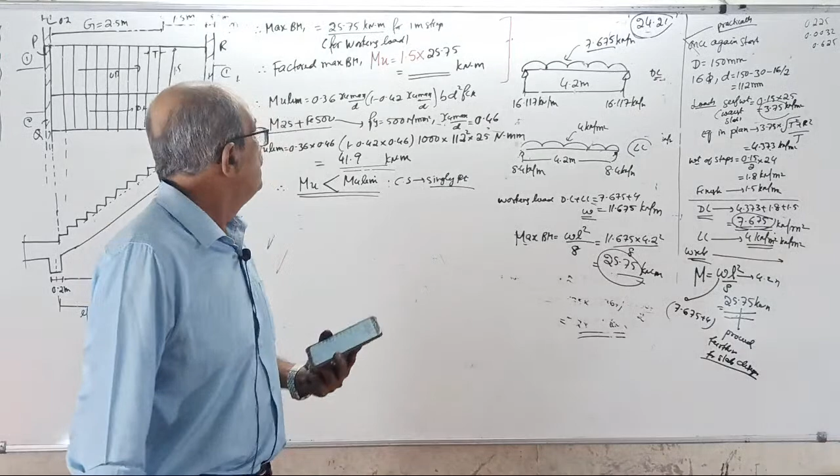Class after class I shouted like anything - be careful, I even showed the finger also. If you forget this step it is a criminal offense. Why? Because you are allowing the structure to collapse at working load - you should allow it to collapse at factored load. Most dangerous - you are forgetting the safety margin. Now don't make the mistake. How much? It is 38.6.

38.63 kilonewton meter. So your MU is 38.63, limit is 41.9. Therefore, okay. Correct?

Sometimes a newcomer may comment in the comment box saying, sir, mistake, you are taking working load BM as MU. I will tell him why I left the gap there. See the gap, I showed a red mark there, to show you that I know that one. See, why I left a gap there?

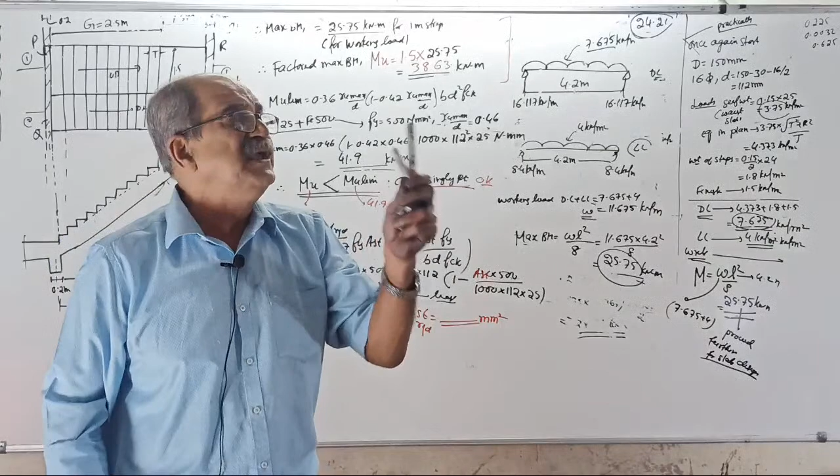If it is an offline class, by this time at least 50% of students will give the answer. Why? They got the trick. Answer, solve this quadratic and tell AST required. If you delay, unnecessary time is wasted. Solve the quadratic, give me AST required.

Shall I come after half an hour or one hour or one more week? This much time to give AST required, but don't give wrong value. I will sit here till you give the answer. Not one, at least two people have to give it, because I do not want a wrong value.

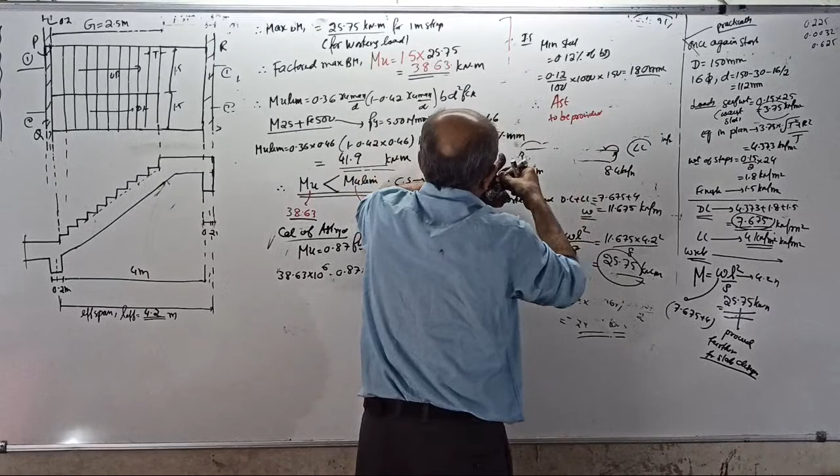Therefore, tell me what is the AST to be provided. How much answer? Requirement is 956, you should not give less than 180. Tell me, how much AST you have to provide now? You should not give less than the required minimum. How much you have to give?

956 or 180? How much you have to provide? Requirement is 956, IS code told should not give less than 180. How much you have to provide? 956, okay, you have to provide 956.15 mm square.

Okay, now you take 12 torr, 16 torr. If you take 16 torr, spacing equal to, right? I told earlier, area of 1 bar pi by 4 into 16 square, divided by total area to be given, multiplied by 1000. Tell the answer, spacing in center to center, in millimeters. What is the spacing of bars? First, if you give 16 torr, what is the spacing? Spacing of bars.

If you give 16 torr, you may not give 16 torr later. 210.

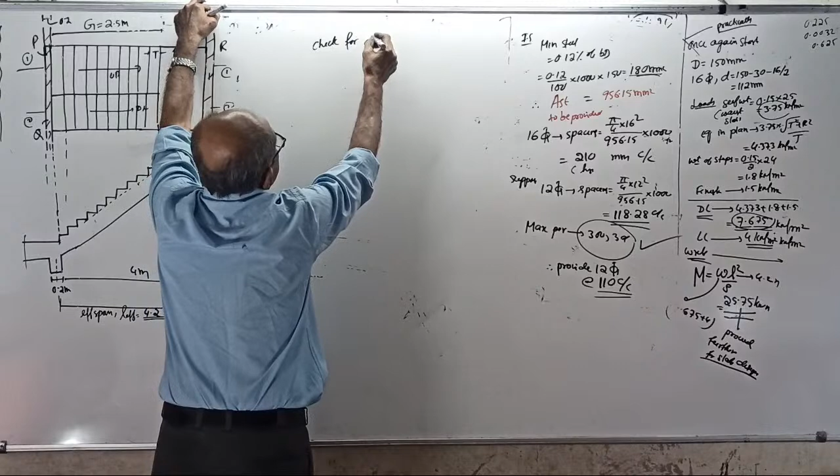Check for deflection. See, tell me first, L by D actual - the danger number. Now remember, since you are going to 12 torr, your D will become more. How much? 150 minus 30 minus 12 by 2. A little more D is there, use it, tell me the answer.

Since it's 12 torr, use it - revised D, how much D? It is not 112, a little more D is there, use it, how much? A little more D, because you are changing to 12 torr - 114. Use it, 114. Okay, now L by D actual is...

4200 divided by 114, tell me the answer. This is the danger number, we want this number within the limit. If this number is very high, it is going to be unsafe. This is a danger number. Why? More span and thin section. L by D actual is 36.84.

Okay, now calculate what is L by D maximum permissible. How much? For that, equal to what? Equal to 26 into modification factor on tension side. I told why 26 - because fixity and continuity is there.

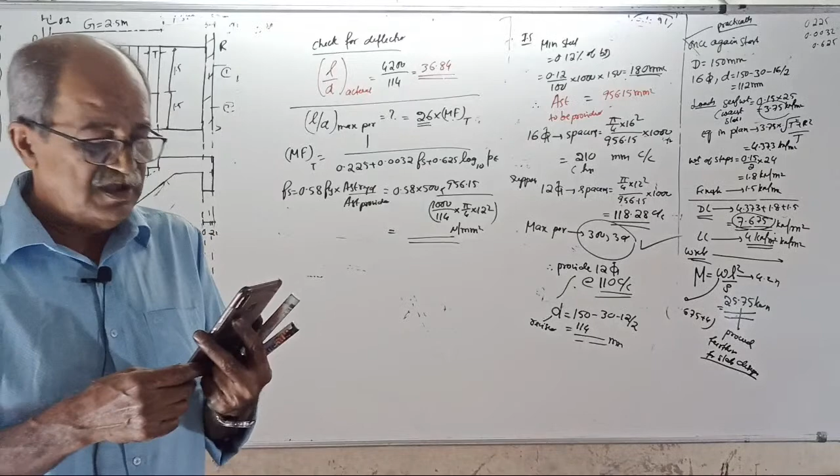How much is the answer? 269.68.

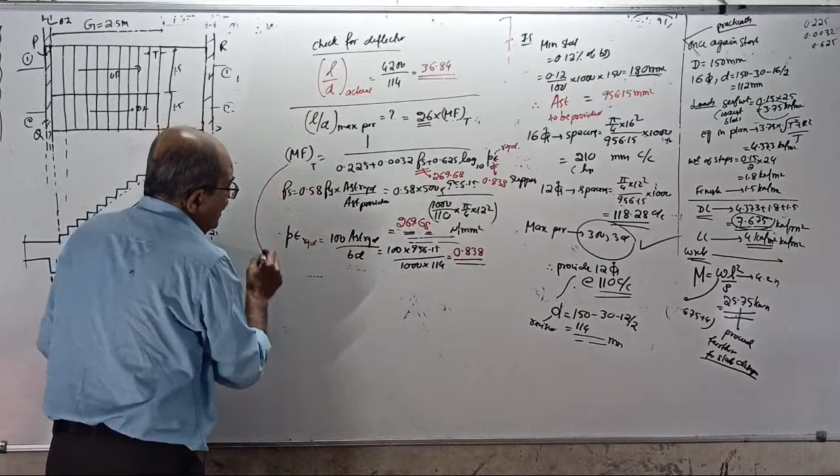269.68, so Fs you substitute 269.68, PT you substitute 0.838. Tell me what is the modification factor on tension side. Substitute that value, get me MFT on tension side, based on tension steel. Get MFT fast, tell fast MFT. MFT fast, 1 point, it will come 1 point something.

Fast, if you are using Excel, by this time this would have been over 100 times. 0.961, na? 0.961, don't give wrong value. 961. Therefore your L by D max permissible is how much? 26 into 0.961, tell the answer.

It's a good thing that happened now, I will tell you why. It's a good thing that happened. 26 into 0.961 equals 24.986. 25 agreed, 24.99 it comes, shall I make it 25? 24.986 is 99, or 25. Okay, 25.

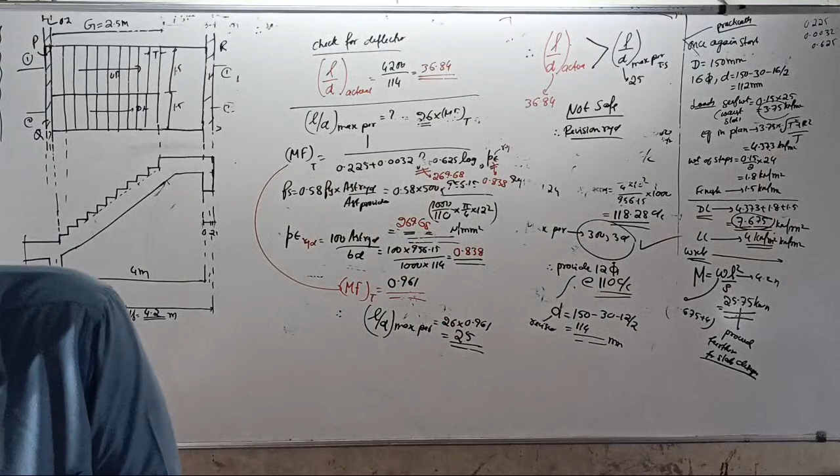Tell why it's a good thing, tell why. Therefore revision required, revision required. Tell me why it's a good thing, tell fast, why did this good thing happen? Why good? Fast, tell me. Why is it good? No, tell me, why? Reason. Why good in the class? It happened because you are learning for practical design. Why is it good? See, unsafe means, why am I telling it's good?

You will know once again. Therefore remember now, lastly I told you after the class is over I may briefly explain once again for practical purposes. Now I don't have to. Shall I explain now only, briefly with the calculation, so that you can make a note of how fast you can do it, what speed you can do, all that? Clear? I can explain now only, so time is saved. Yes, okay, see now tell me.

So your earlier D was 150 millimeter, which was found to be not safe. So try a little more. Capital D equal to... see, if the staircase span is 2.5 meter, 3 meter, or 3.25 meter, or up to 3.5 meter, 150 thickness is sufficient. But if it is an office building, it may become slightly unsafe with heavy loading and span around more than 4 meter, that too for a public building, 150 is not sufficient.

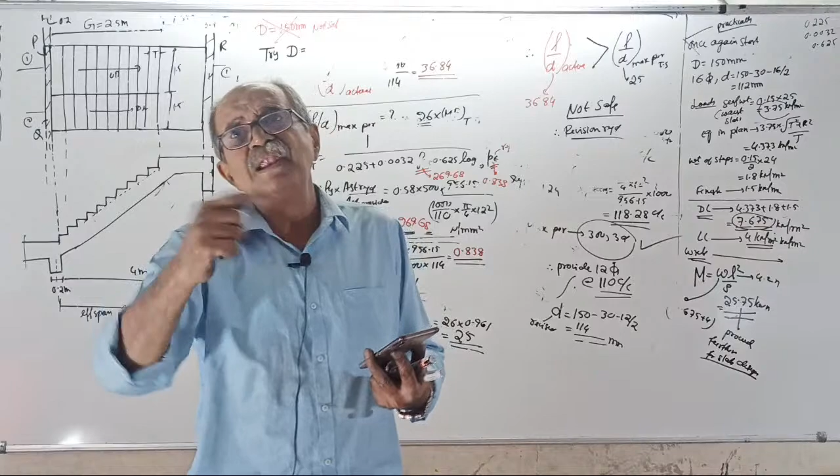As D increases, required AST becomes lesser. When required AST is lesser, your MFT will jump, which is an advantage. So we won't try 200, we'll try 175 instead. This time take 12 mm bars only, since last time 12 mm came and this time the 12 mm spacing comes a little more, so just take 12 mm.

Your actual D equals D actual equal to 175 minus 30 minus 12 by 2. Keep giving the answer. I am revising once again so that unknowingly I explain the full staircase once more, both the ETABS model and the practical design.

Small d, don't waste time, give values fast. 139 millimeter, see, I will tell once again.

Arrangement is not our problem. Decide center to center span. You take span by 30, found to be unsafe, so you take a little more now, that is thickness of 175. Now see, fast.

First calculate loading. Now this is the final chance for you. Remember, consider 1 meter strip. This is very important, so B equal to 1 meter or 1000 millimeter.

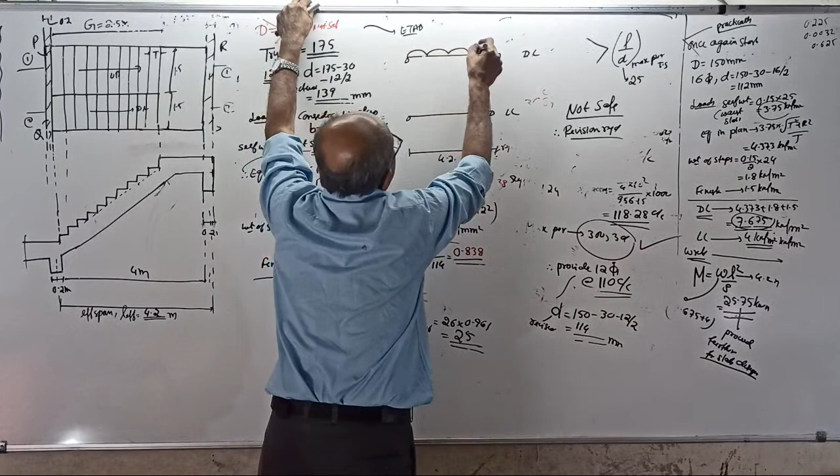Now go to ETABS. One sketch for dead load, one more sketch for live load. Span 4.2 meter. Dead load how much? Live load how much? Actually, inclined portion has more load, landing portion has less load. What do you do? See that way.

We will take the higher load, no time to waste with sigma m, sigma, that's all not required. Some will say sir, this portion's load is lesser. So what? Safer side, consider high load only. So this dead load equal to, this is cancelled, 5.1 plus

1.8 plus 1.5. Answer: 5.1 plus 1.8 plus 1.5, fast, don't waste time. By the time I finish it will be fully clear: 8.4 kilonewton per meter square. Live load is 4 kN per meter square.

Remember, this is for ETABS. Reaction: 8.4 into 4.2 by 2. Reaction: 8.4 into 4.2 by 2. Reaction: 8.4 into 4.2 by 2, giving 17.64 kilonewton per meter.

Here, 4 into 4.2 by 2. How much? 4 into 4.2 by 2. Answer: 4 into 4.2 by 2 gives 8.4 kilonewton per meter.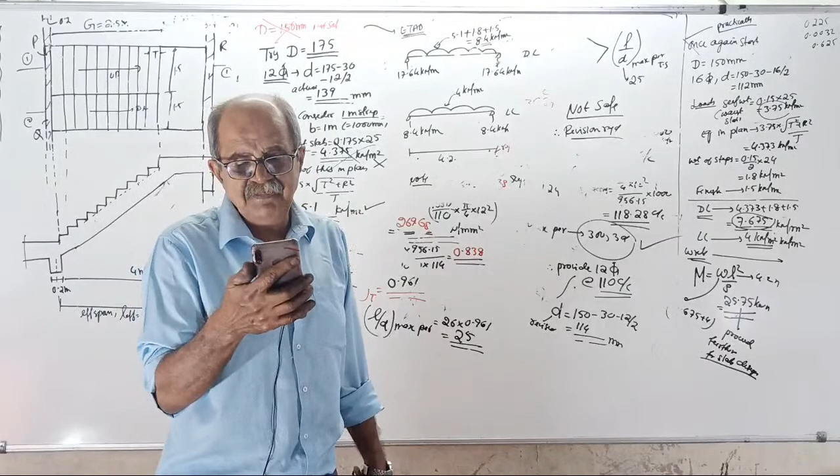For the staircase beams, where contact is there, for the contact length, we will assign dead load UDL of 17.64 kN per meter, and assign live load UDL of 8.4. Write it that way. Then note, this is for ETABS.

Now back to slab design. Why waste time? Put a beam of 4.2 meter and write dead load plus live load. How much, tell me directly: 5.1 plus 1.8 plus 1.5 plus 4. Once for all, when you design the slab, you don't require dead load separately, add all the loading in a single step.

Answer: 12.4 kilonewton per meter square.

This will directly give you maximum BM. Actually, it will give slightly higher BM because some portion here loading is lesser, but still you are taking more load. Some portion at the end has lesser load intensity, but critically the load is severe. For simplification and time saving, and to be on the safer side, we are taking critical load.

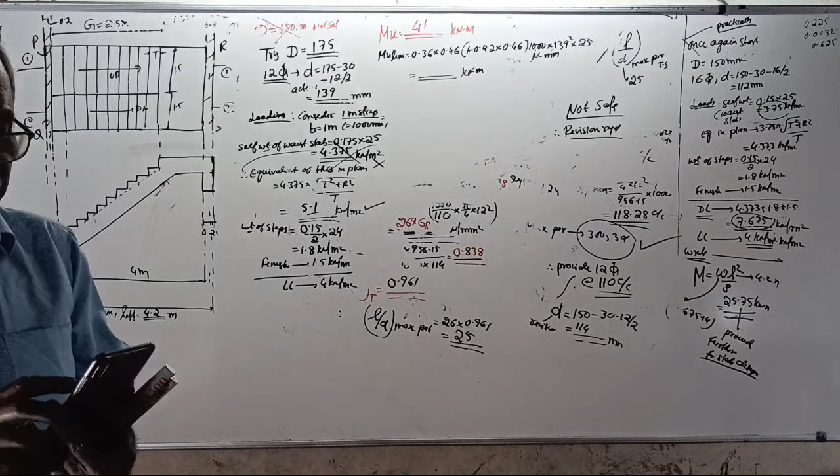So many people got bored, they left the class. Maybe they thought they are knowing too much. How much they are knowing, I know it. And again, remember, this is not an academic class. Practically, I am telling, it's for ETABS purpose or for people who are learning design, useful for them.

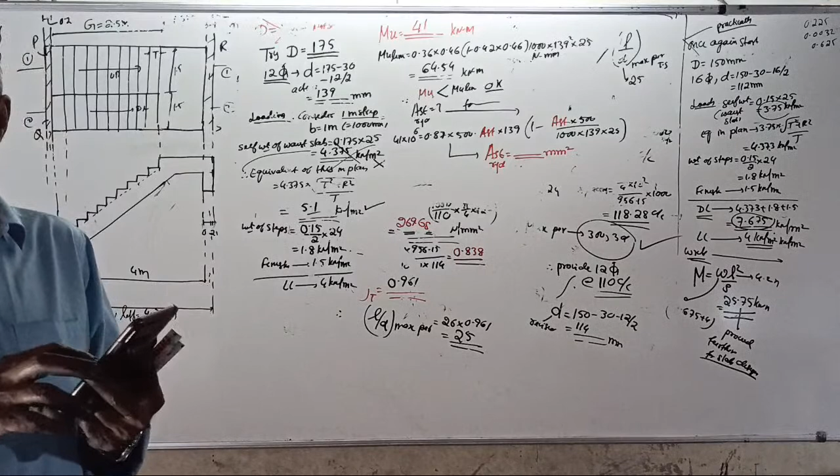AST required. Because in the next regular class, staircase will not come. This is a gift I am giving you, extra information for learning. Because everybody told 'required', almost all replied required.

AST required, again wasting time. See, when people are present, they don't involve - this is what happens, time is wasted. I am not calculating, I am doing rough calculation.

Huh? What is one? Was something wrong?

761.52 mm square. Okay, now, which is less than - this is more than the minimum requirement of 0.12 by 100 of 1000 into 175. Tell what is the number here? Minimum steel - you should not give less than that number. How much is that number? 0.12 by 100 of 1000 into 175. What is the number?

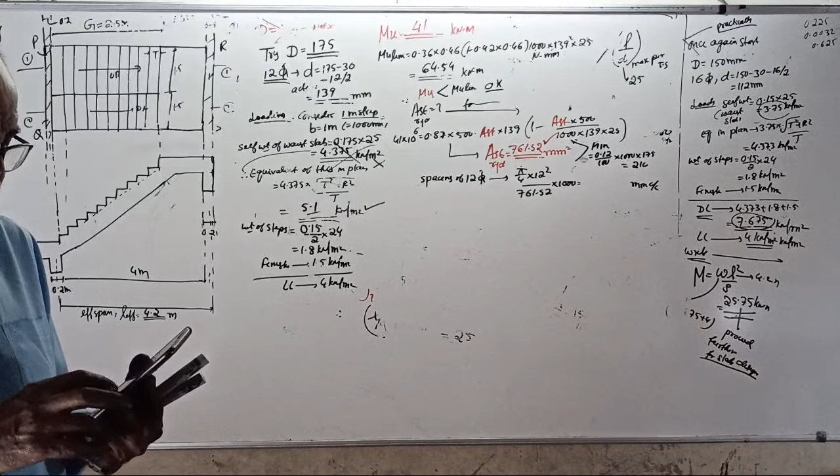See, not giving answer. Spacing. 147.93. 147.93.

Okay, we will provide how much? Provide 12 tor at 147.93 means practically, tell me how much he will give. He won't give 140, safer side. Tell how much he will give. People want safety. How much he will give? He won't go for 140. He will round up to 5 inches. How much, safer side, how much he will give?

He will tell, okay, what is this cost? Safer side for staircase, 125. We also liberal, say at 125, center to center. Safer side, millimeter, center to center.

Okay, now check for deflection control. Check for deflection control. Okay, start. First calculate danger number. L by D actual, this is the danger number. Danger number equal to

4200 by 139. Now tell the answer. L by D actual 4200 by 139. 4200 by 139. 30.21. Okay, 30.21 is a danger number.

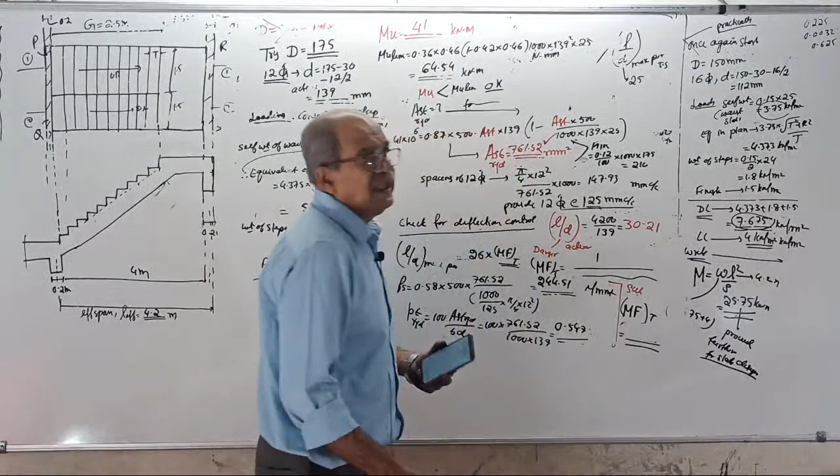Okay, with that data, what is MFT? With that data, what is MFT? Over question, nothing is there now. Now just one rough sketch I have to give. I will give that rough sketch. One rough sketch I will give you. Detailed sketch will come in the project later. Some IS code provisions are there. That all I will not tell today. Today I will tell you rough arrangement of steel. MFT.

What are you doing? See, this is the problem of live class. No, only a limited number of people are participating. Others will not give any answer.

MFT. Okay, I will take rest. If you don't give, what I can do? With that value, MFT. You are actually wasting time. 1 by 0.225 plus 1.185. Correct, I can make out. 1.185, okay. See, anywhere, in case there is a calculation mistake, you don't consider it.

Now, therefore, L by D max permissible equal to 26 into 1.185. Tell the answer, 26 into 1.185. Answer, 26 into 1.185. 26 into 1.185. If anything is wrong, you correct it. Our important thing is understanding here. Calculation mistake, I am not responsible. 30.81. Oh, narrowly escaped. 30.81, see now.

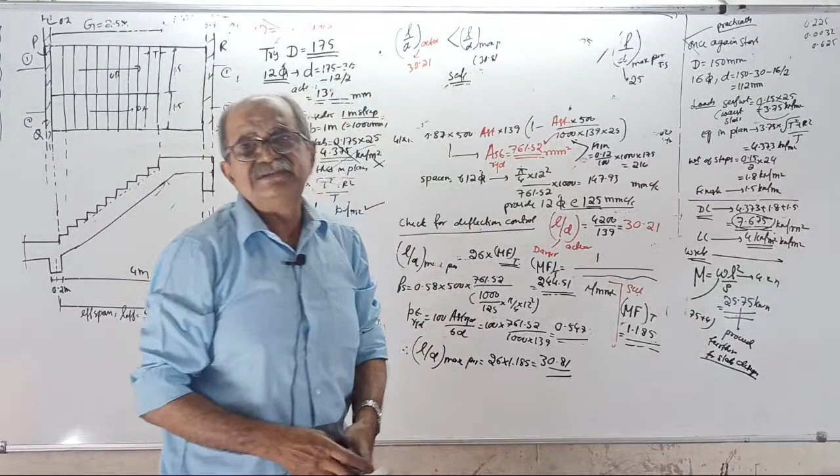Therefore, see here, your L by D actual danger number, which is 30.21, is less than L by D max permissible of 30.81. Safe or unsafe? Tell me. Safe or unsafe? See, just 150 increased to 175 suddenly becomes what? Safe or unsafe? Safe or unsafe? Speed is 30.21, police is permitting up to 30.81. Safe. Now, by chance, if it becomes unsafe, you don't have to once again increase the thickness.

What you can tell me? Instead of providing 12 tor at 125, reduce the spacing. Provide 12 tor at 100 spacing. Suddenly your fs will drop down and therefore it will come safe. This I told you, by providing little more steel. But that you should do only when you get marginal unsafe. Last time serious unsafe, so we increase thickness. This time marginal, so you can do it. Remember it? I told earlier. Remember or not? Marginal unsafe, you can do it. Slightly increase the steel. Remember it? Okay, now last step, everything is over. Main steel is over. Lastly, calculate what is the distribution steel.

Distribution steel. Area of distribution steel equal to minimum reinforcement. Minimum steel equal to 0.12% of 210 mm square. Take only 8 tor.

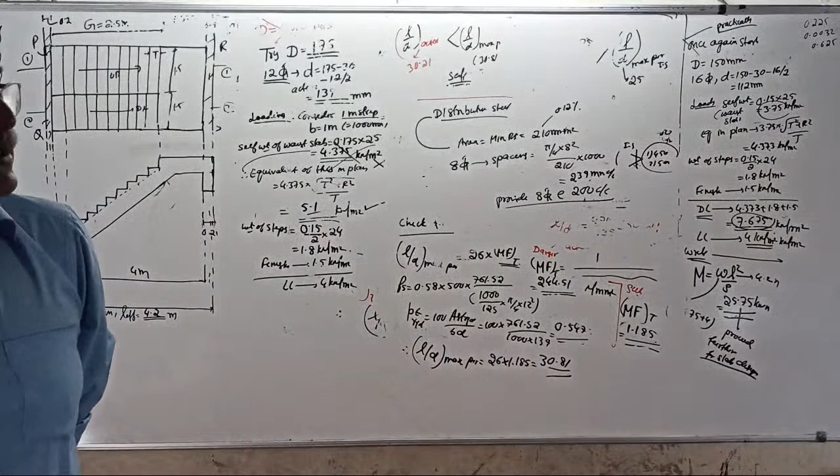So provide 8 tor liberally at 200 center to center. Provide 8 tor at 200 center to center. A little liberal, but okay, no problem.

Now, lastly, put a rough sketch. Some more IS code provisions for staircase detailing I will discuss in the ETABS class. Remember, not here - in the ETABS class I will tell you more. Because when you do the project, detailing will come there, and I will cover it and tell some more things for you.

But for open well staircase type, one flight goes this way, one flight goes this way, one goes this way - the principle is the same. How to transfer the load: two mid-landing beams are required. In the open well staircase, you require 2 mid-landing beams, not 1 mid-landing.

Usually it goes round the lift. The lift will be there, round the open well. There will be 2 mid-landing beams, one at first flight level, one at second flight level, then floor. That all I will tell in the software class about load transfer.

Now rough sketch - just one flight, put the sketch. Cross section of first flight. Start here. This is the slab coming here from this side.

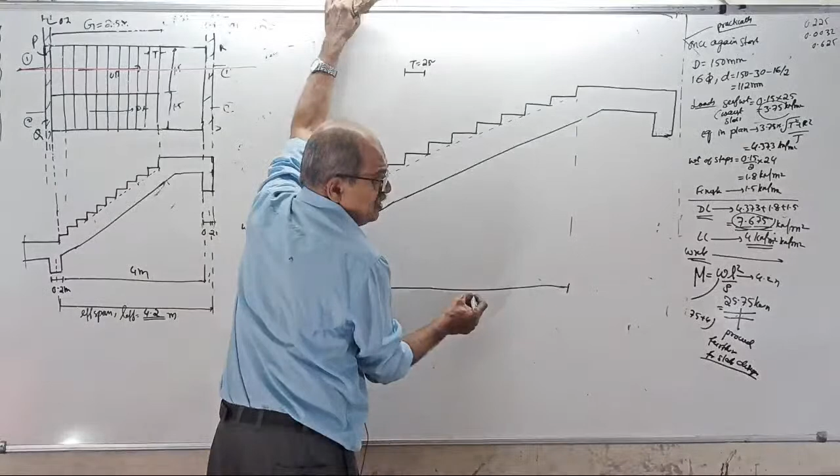Now, rise here - remember, rise equal to 150. Anywhere remember, tread equal to 250. Dimensions: this is 200, from here up to here is 2000, then 2500. From here to here, clear distance - landing is 1500.

This is 200. Waist slab thickness - what is it? Waist slab is 175 thick, no space to write here. 175 thick. Now see, correct? 1, 2, 3, 4, 5, 6, 7, 8, 9, 10.

Correct, now see - predominantly sagging. This is the bottom steel, main bar. It will come here. This is your main bar, 12 tor at 125 center to center. This is the distribution steel.

That is 8 tor at 200 center to center. Now what will be done is, these bars - you require bottom here - no. What they will do is, all these bars will be taken to top and turned here.

I think you know it practically - yes or no? These bars will be directly taken to top. Correct or not? They will take it to the top and turn it to take care of any hogging there. Yes.

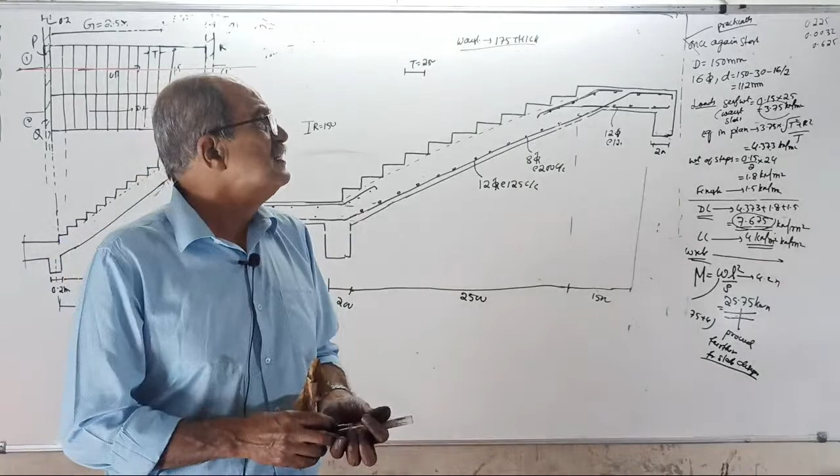What is the distance you have to extend this bar, up to where you have to extend, all given in SP34. During the project, I will explain all those details for you. Clear now? Not now, because now this is design of staircase main principle - load transfer, then conversion of the weight, and then how to decide slab thickness, how you calculate bending moment, then how to point steel, etc.

Approximately, detail only I told. Okay, further I will tell in the software class. In the software class, during project, I will see once the project is completely over. Lastly, when everything is over, I will continue the class for 2 more classes. After the project is over means what? Building model done, earthquake etc., everything considered. Not only dead load, live load, including earth load. And once your result comes, then I will tell you how to detail that one.

Beam I will not tell. Tell why - at that time, beam I will not tell. Reason, beam I am not telling. You don't know the reason. Already since past 3 classes, we are struggling for a beam, that 8-span beam. Yes or no? How much I explained there for you - top steel, bottom steel, etc. So beam I will not tell.

Slab also I will not tell, because when I go to SAFE, as soon as I make SAFE model, simultaneously I will explain how to give slab reinforcement. So in the project, the column I will explain, staircase I will explain, and footing part I will explain. Clear? After that only, drawing I am not giving here. Detailing - how you have to give detailing for draftman. He will prepare drawing and send it back to you. You check it and verify.

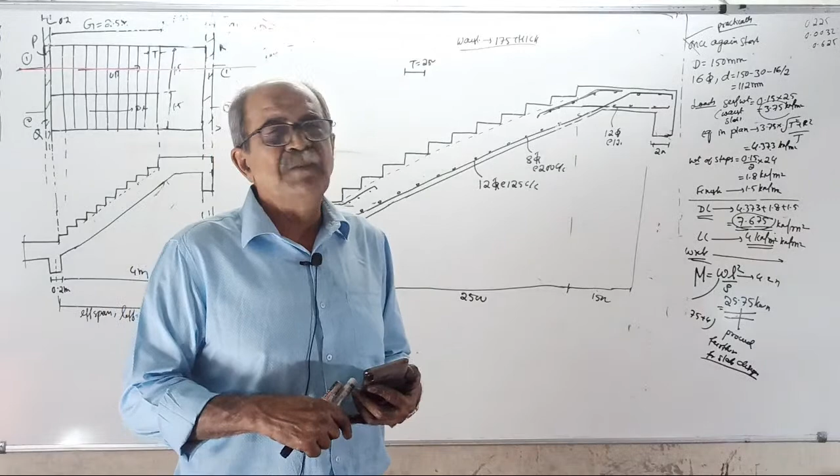Okay, hope staircase class, I told all required. Really useful? At least some information you got for staircase now. By attending the class, some good information you got. At least your confidence level now is better. By this class, your confidence level is better now.

Or suppose this class, suppose you decided not required, then tell me, you would have really missed something. If majority people tell, sir, not required, we want to go to SAFE, time is not there - if by chance I have not told these things, you would have missed something important or not. Something important about load transfer, all, you would have missed then.

That's why I told, to the best of my possibility, in the available time, I will take a class for staircase. Coming week, Saturday, I am completing that beam. See, top bar up to where extend, bottom bar what, where to curtail - that will take nearly 1.5 hours. There are some important points there, that number problem. Complete beam I will finish on that day.